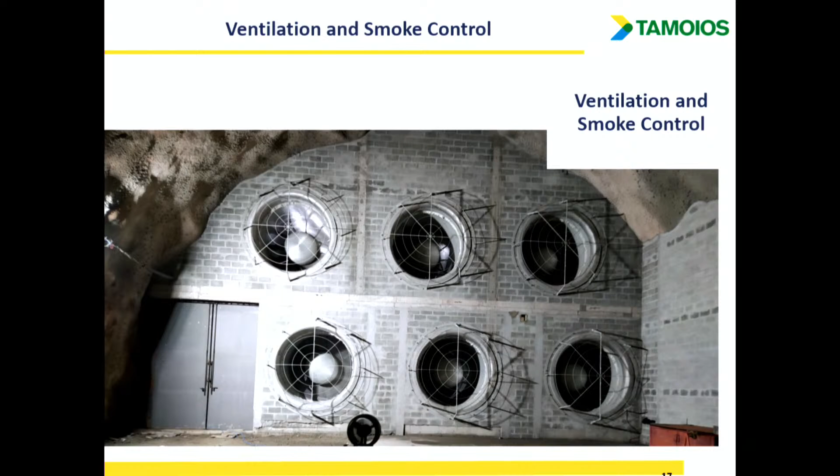The cost of the operational of the solution - but in case of fire, we need to extract the smoke more or less in the middle of the tunnel. So there is a huge smoke extraction system. It's a big cavern inside with a small shaft to outside. This is the back of the smoke extraction. The fans have 3 meters of diameter.

I told you that there are cross connections at every 200 meters. Of course, we need to protect them, and there is a specific system for pressurization to create overpressure in the cross connections in order to avoid the smoke getting into these cross connections.

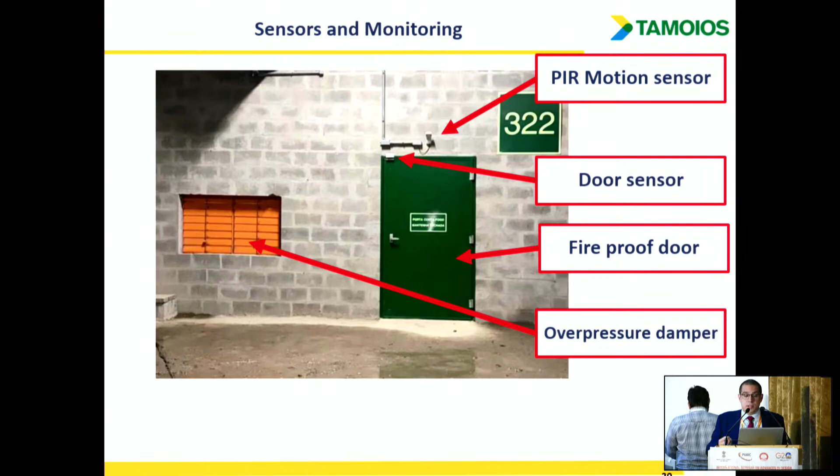And here I start - why we decided to install so many things in the tunnel? First of all, we need to monitor if those doors are used or not. This pressurization system keeps it shut down. There is no need to keep the cross connection pressurized if there is nobody there. So basically, you have sensors in the doors and also infrared motion detectors to detect if there is someone there. If someone opens the door, then we start the system. So it's a bit complex in terms of automation, but this can save a lot of money during the whole life cycle of the tunnel.

We install also in the tunnel a lot of sensors, as was discussed this morning as well. We need to monitor the air quality. In Brazil this is required by law: monitoring the opacimeter of the particles in the air, the NO2 and CO. So we have these 3 sensors along the tunnels, and also anemometers to check the airspeed.

There is also a loudspeaker system, of course, and this loudspeaker system needs to be audible for the people. So it's also important to have a noise sensor in order to control the volume of this system.

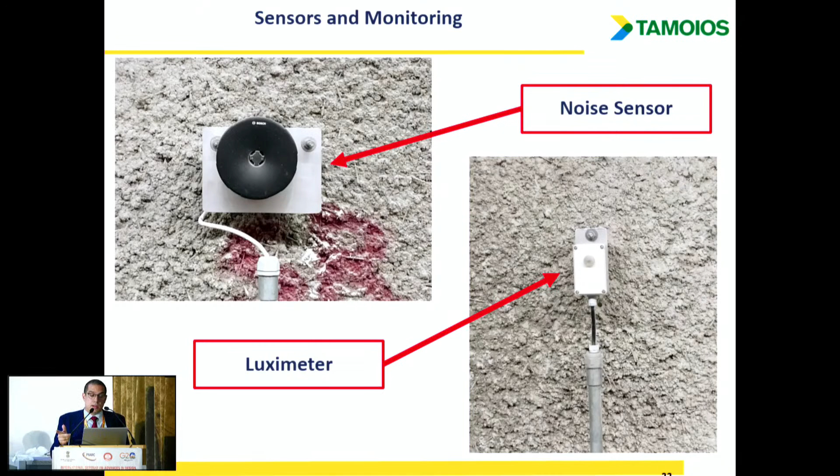We installed luximeters along the tunnels, and it's interesting because we need to make sure how much light we are giving to the drivers. Normally during the lighting design, we assume that a part of the light is lost by dirt on the luminaires or by the aging of the luminaires. But if you have no control of it, since day zero we are giving more light than is needed. In my opinion, it's too much light. If you compare how much light you give inside the tunnel versus a normal highway, tunnels are over-illuminated in general. And this represents the biggest part of the electric bill.

So, the ventilation sensors in more detail: it's a system combining the opacimeter, NO2 and CO, and anemometers. What are the goals of so many sensors in the tunnels? The air sensors' main goal is to get the most accurate information regarding air quality in the tunnel. If we have the right information from the tunnel, then we can make the right choices. It's impossible to keep those fans running if they are not necessary. So in order to make sure people are not subjected to pollutants beyond allowed limits, we need to meet air quality standards. Also during emergencies, it's important to keep control of the longitudinal velocity of the air, specifically because in tunnel 3/4 we have a smoke extraction shaft that requires some automation. Otherwise all the tunnels are longitudinal, which is easy - just press the button, turn on all the jet fans in the correct direction, and that's it.

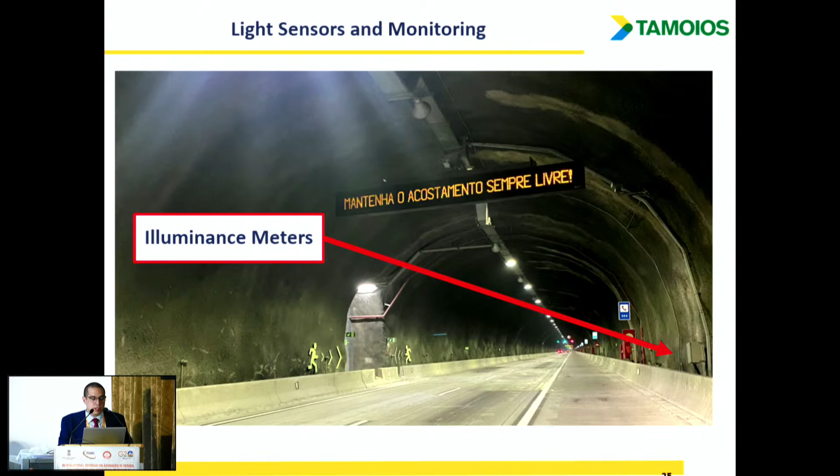In terms of lighting, I'll show you later why we decided to install so many lighting sensors. We have illuminance meters on the walls. The aim of those illuminance meters is to make sure how much light we are having from the light sources, not giving it directly to the drivers. They are small boxes on the walls, installed at every 100 meters.

Of course, in order to control the light and the adaptation lighting at the tunnel entrance, there are luminance meters. We have two luminance meters on each portal, at two different distances, used in two different scenarios. The goal of those meters is to get information from the external light in order to dynamically adapt the lighting. There is no reason to illuminate the tunnel entrance as if there were full midday summer sun if it's very early morning or late afternoon with no sunlight at the tunnel portal. The illuminance meters along the tunnel are used to control for dirt on the luminaires.

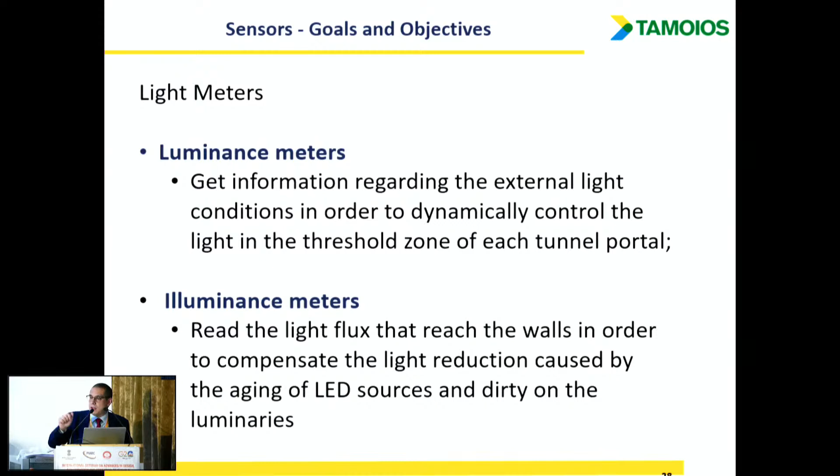In this case, we can give more power to the luminaires since we're planning a cleaning process in the tunnels.

So this is a general arrangement of the tunnels. There are also signals and communication. There are VMSs along the tunnels. And of course, CCTV and incident detection.

And the firefighting system. So we decided, based on Brazilian regulation, to install only the basic firefighting equipment. It means we have, at every 60 meters, this emergency point where there's available water, a fire extinguisher, and a telephone to communicate to the control room. Important thing was decided with the fire services: this system must deliver the same amount of water pressure and flow rate they have from their own fire tender.

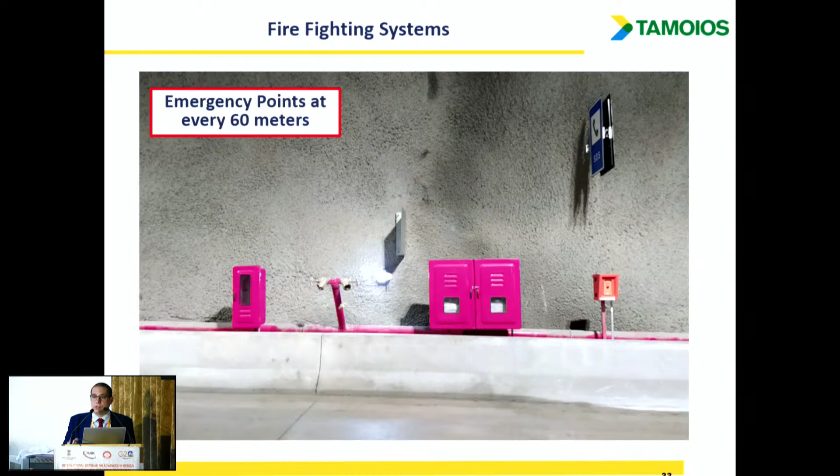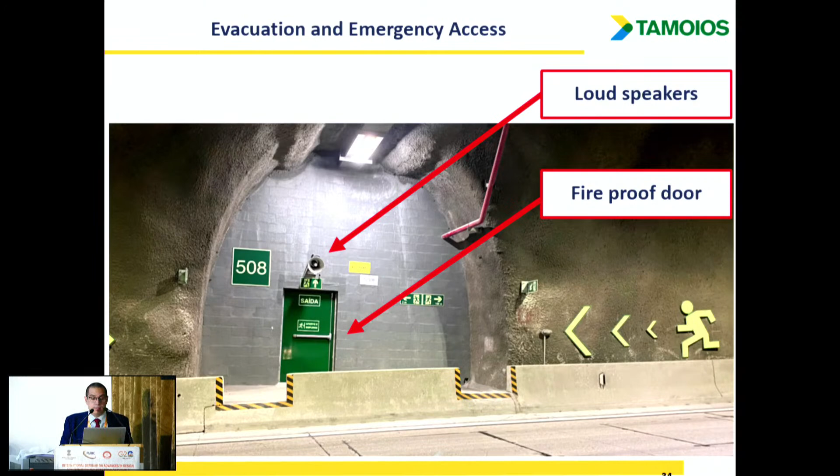So it's quite a big system. And of course, to protect evacuation, we have loudspeakers to guide the people there. This was a requirement by a specific Brazilian law that says we have to design the tunnels for deaf people, blind people, disabled people. So this was a requirement by the state. And of course, the cross connects are protected by fireproof doors.

So the water reservoir has 240 cubic meters, and the pump room is located in the highest part of the tunnel. So this was a brief presentation about the tunnels, but what are the main costs?

During the design, the customer was asking us—because this is a PPP project, it means the government is paying with public money for the construction, because the infrastructure belongs to the state. But the private company, with money collected by toll, has to pay the electric bills, maintenance, personnel, refurbishment, etc. So it was a huge question about how much this costs during the operation phase.

And we did a lot of studies at that time, and we decided a few things. First thing is that electricity is our biggest cost in this project. And we took two interesting decisions.

First decision was we only buy electricity from the grid to keep a normal operation running. It means in case of emergency, we generate our own energy based on diesel generators, because we don't have emergencies every day. So there is no reason to buy electricity from the grid 365 days a year if there is an emergency once or twice a year. So there's a stronger diesel generator system in the tunnel itself, in the tunnel portals, that can generate more than enough electricity to deal with any kind of emergency.

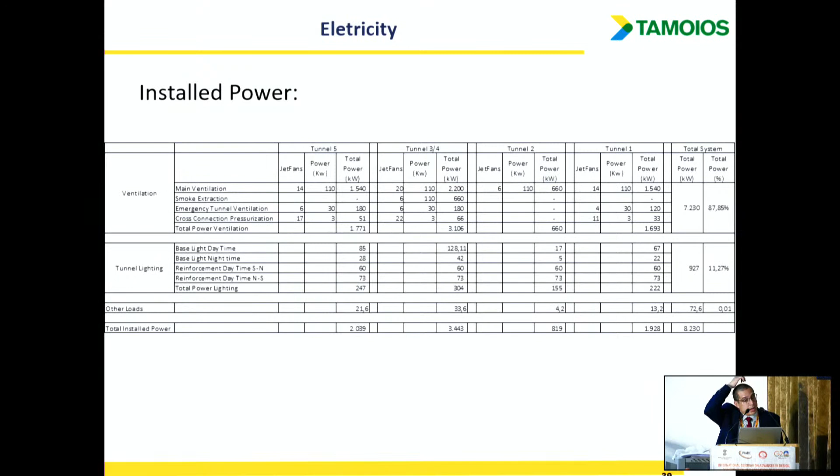Just to give you an idea about the electricity problem, in terms of installed power, the ventilation corresponds to 87.85% of the total power installed in the tunnel. But as Professor Peter Sturm told us in the morning, we normally do not use this if the tunnel has longitudinal ventilation with unidirectional traffic. For this reason, we decided not to buy this amount of electricity from the grid.

The tunnel light corresponds to 11.27% of the installed power, but corresponds to 95% of the electric bill. So for this reason, we decided to be very detailed in terms of monitoring the light and controlling the light, of course. Why did we decide that?

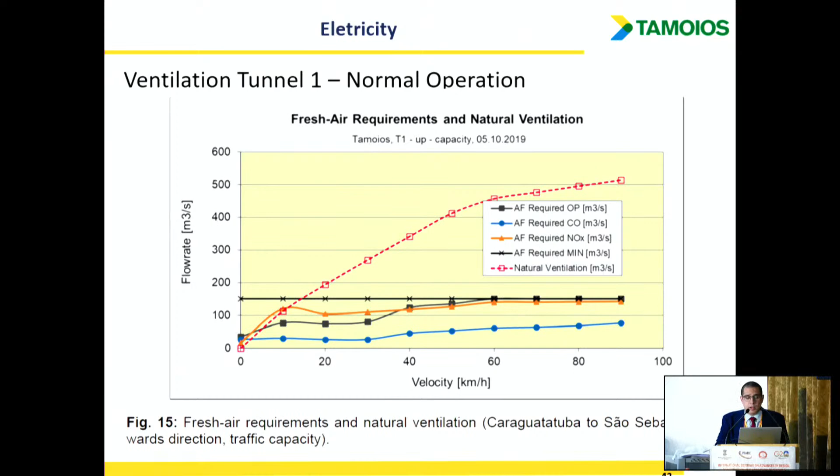During the studies for that, during the design, we computed the amount of fresh air required for the tunnel operation. And as the ventilation, as you can see here, is the biggest power installed in the tunnels, we looked into detail at those figures. And we found out that for a few tunnels, as I show you here, after 20 kilometers per hour—if the traffic is moving faster than 20 kilometers per hour—the natural ventilation generated by the car movement, buses and trucks, is enough to generate a flow that is more than sufficient to dilute all the pollutants inside the tunnel.

It means it's ventilation for free. But important: this is only valid if the tunnel is unidirectional, and if you know the traffic. If you don't know the traffic, it's difficult, or if you don't know the emissions, it's difficult.

But Brazil has quite good emission standards, and we could compute that it means we have to avoid at any cost traffic flowing lower than 20 kilometers per hour. If this is true, we don't need to start the ventilation, and of course we don't need to buy electricity or turn on the diesel generator.

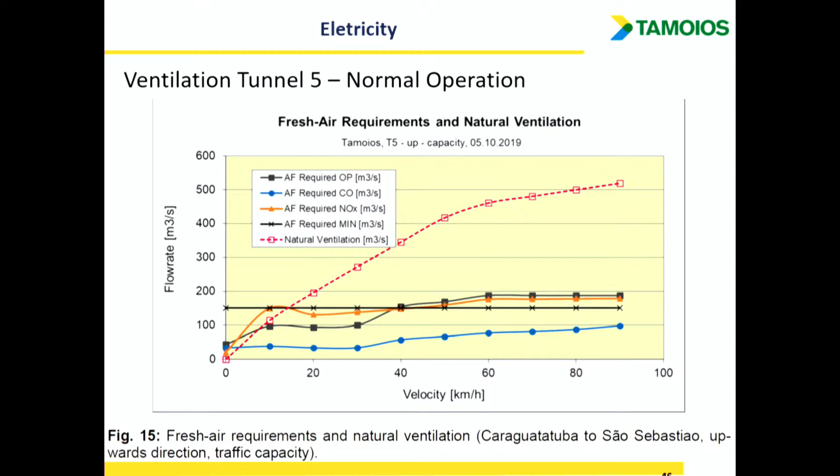For the 4 tunnels, as you can see, the lengths are a bit different, but more or less, at every tunnel, if traffic is moving over 20 kilometers per hour, it's safe. The natural ventilation generated by the cars is sufficient for normal operation.

So, as I told you, we decided in this project to install the electrical rooms just in the portals, and inside the electrical rooms there are the diesel generators.

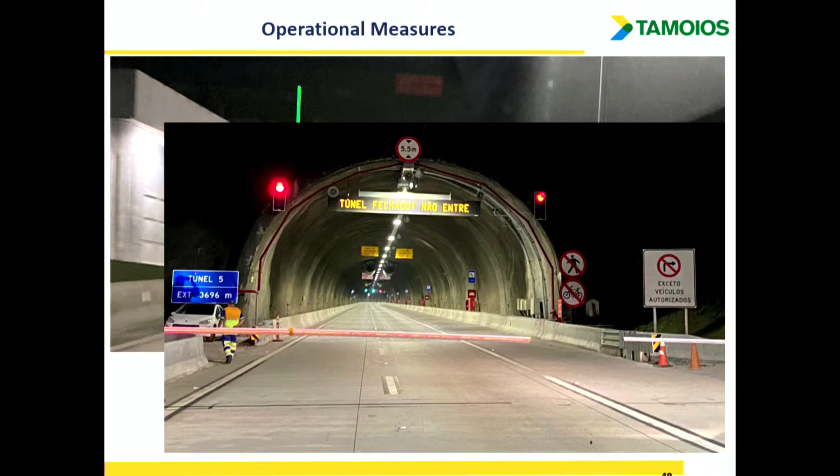As I commented with you also about operational measures, in case of tunnel closure - this is a tunnel portal, tunnel 5. Normally it's working like this: it's open, you have a green light, and the VMS is showing a normal message. But in case of emergency, or if you need to stop traffic for any reason, we do it directly from the control room, and this is the scenario drivers see in the tunnel. So there is no need to send personnel there.

So lighting, as I told you, is the biggest part of our electric bill. It means we have to be very detailed in controlling it. I know Pierre has a good presentation about this subject as well. It's an important subject, and the committee decided to investigate it also for the next cycle.

So what we did is already running. During the daytime, the light levels are more or less controlled by the outside lighting levels, and also by weather conditions. If the pavement is wet, it means we need more distance to stop cars, and we need to illuminate a bit more. But if the pavement is dry, there is no need to illuminate the tunnel entrance so much. We also consider traffic volume outside and the average traffic speed.

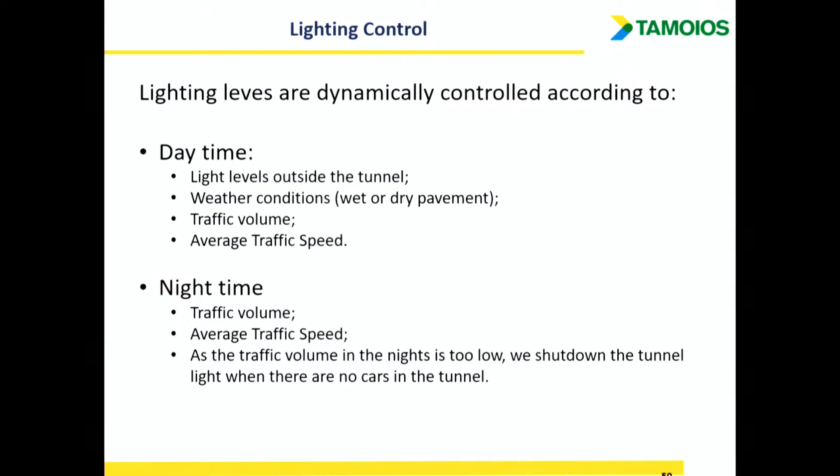I'm finished here. During the night time, we control it based on traffic volume and average traffic speed. It's important - during the nights the traffic is very low, so we basically shut down the lighting system and use just part of it. Thank you, and I'll be available for questions at the end of the session.

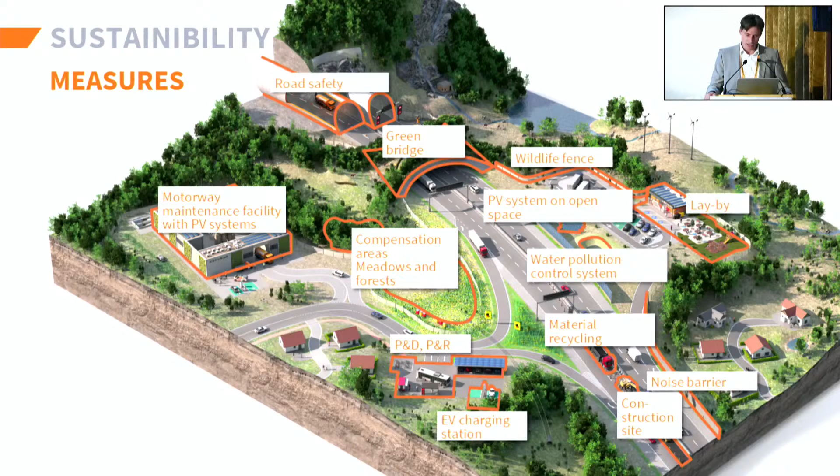Our sustainability measures are not only related to energy and operation savings in that area. We are also doing things like green bridges for animals, wildlife fences, material recycling from construction, installing noise barriers, and last but not least, installing a lot of photovoltaic systems, solar panels, to generate power and supply it for operation centers and also for our customers and infrastructures.

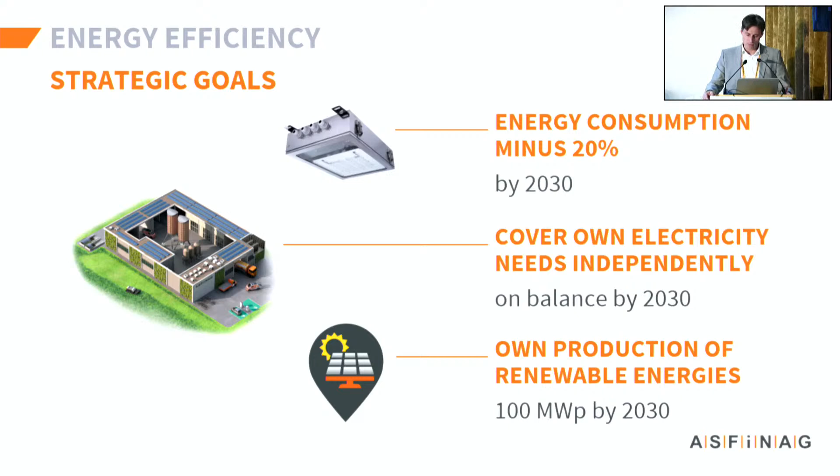What are the strategic goals of ASFINAG in the energy area? The first goal is to reduce energy consumption by minus 20% till 2030. Then we want to cover our own electricity needs independently on balance, meaning the total energy volume we need has to be produced by the road infrastructure by 2030. Therefore, we need to install around 100 megawatt peak photovoltaic system on our road network.

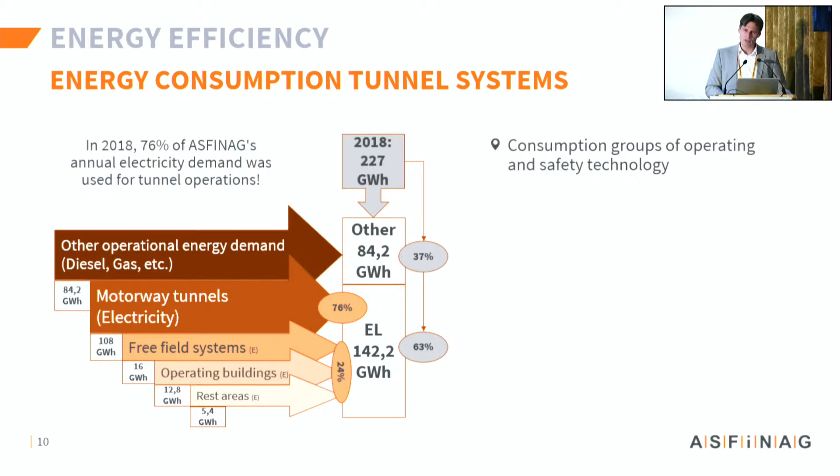When you look a little bit more deeper into detail, you can make a grouping of the safety equipment. There are some studies available on the market, by Astra, a Swiss company, and CEDRE is publishing these evaluations. For Austria, the best split is from CEDRE, what you can see here. The most important thing is, for your situation, your country, you have to see what is the energy need and the split for the equipment.

As we learned, when you have to run ventilation, you need a lot of electricity for the ventilation system, in terms of traffic jams. When you don't have to use the ventilation, then the energy goes to other operational equipment. In our case, we have 4 areas where 90% of the energy is consumed: lighting, the emergency power supply, the signaling, and the air conditioning of our technical buildings - this is the area where we install our communication equipment and the controllers, the servers, etc.

Now I want to give you a little bit of ideas what you can do, or what we do. The first is, as we just learned, the lighting. So what we do is install only LED lights. What you can see here is the ASFINAG standard tunnel luminaire lamp.

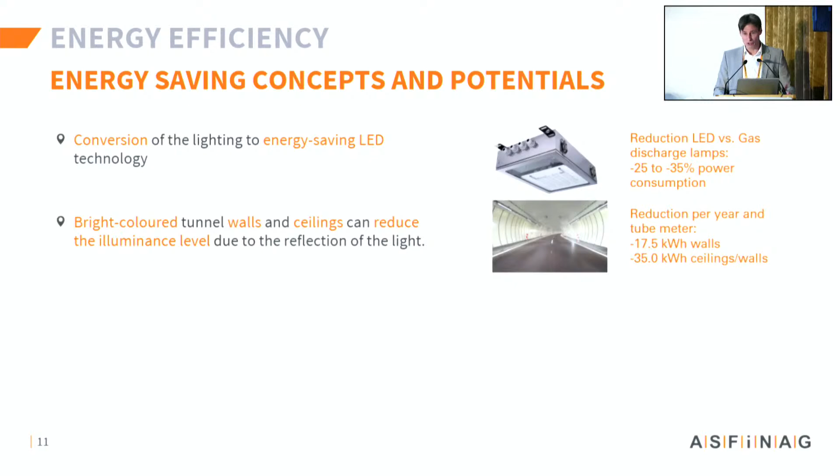The reduction option depends, but is on average around 30% energy savings. When we look at the tunnels themselves - we have seen now the Brazil tunnels, which are more or less dark - we believe that bright colored walls and ceilings help to reduce the lighting need. So we carried out an R&D project with one of our universities, and as you can see, you can save 17.5 kilowatt hours with bright walls. In addition to that, when you light up the ceiling, it's a better effect.

Then we have another option regarding the cooling of the technical facilities. Here we have some projects in place where we use the extinguishing water of the standpipe system in combination with heat pumps to also reduce the energy in that area.

Last but not least, this is for me the most important technical application for the future in road tunnels: replacing the emergency power supplies. The batteries, the systems, are permanently loading, so you lose a lot of energy here, and you use the batteries only as a backup for emergency operation situations. By replacing them with industrial battery systems, now available on the market, you can use them in more than one way - also to store your own produced energy and shift the usage into the night.

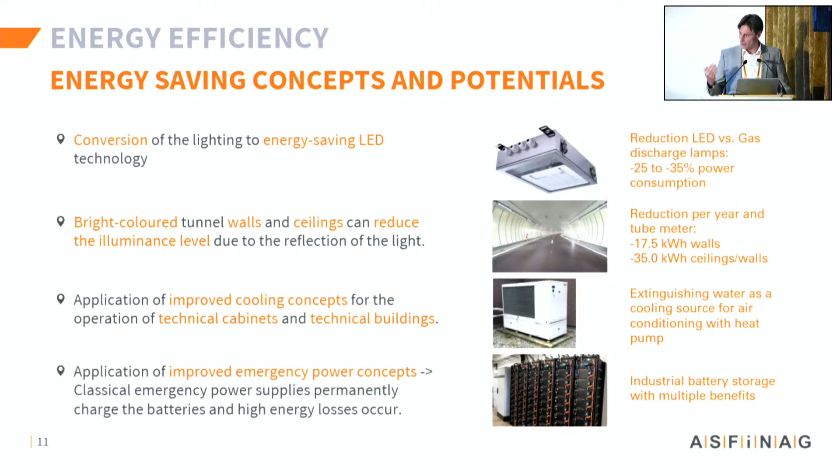When we look at the measures for generating our own electricity, there are some international role models. The Zero Energy Tunnel is from the Netherlands. Then there's a very good report from PIARC, the PIARC Positive Energy Road report, which I recommend. All these reports say the same thing: the road infrastructure should produce their own energy, using renewable energy sources, and everything should happen on a balance sheet base.

When I look at the situation here in India, you have a lot of sun, so you'll have a better situation than we have in Central Europe. And the upgrading of tunnels to smart grid, with a question mark - I'll show this later.

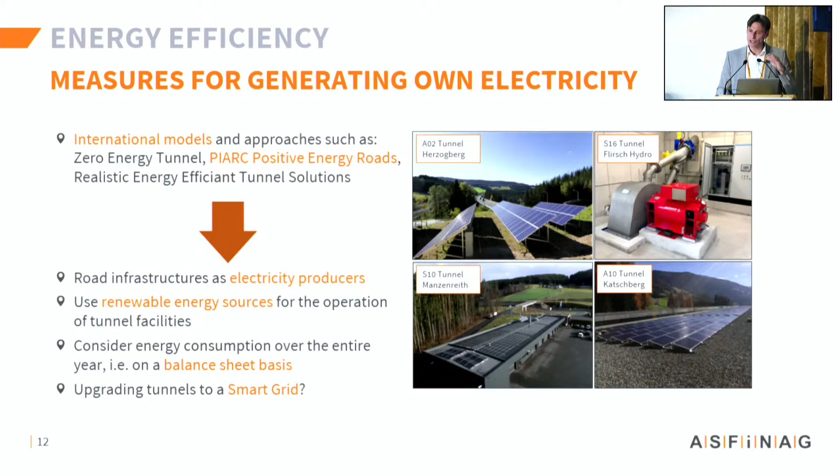So these are some examples of what we do. On the left side is an installation next to a tunnel. We're using hydropower plants when we have water to operate the tunnels, and we're also using our operation facilities where we operate the tunnels - in the background you can see a tunnel. So this photovoltaic installation is feeding or supplying the tunnel.

Some additional information: these are typically operation centers we have, and these are also now getting upgraded with photovoltaic systems. And we are also charging our own car fleet with the energy we're generating from the sun.

Look now at the electricity demand. As we learned before, in 2018 we had 108 gigawatt hours of demand electricity, and by 2021 we reduced already by minus 10%, and to reach our strategic goals we have to additionally reduce by minus 15%. When we look at the cost side, because not everything is about green operations, in 2018 we had 10 million euros of electricity costs, and this was, by 2021, already 11.3 million. So you can see a drop by minus 10% in the need, and the price went up 10%.

But this year, 2022, we had 30 million euros, so 3 times more, because of the Ukraine war and the effects on the energy market in Europe. So when we're talking about the question mark I've shown you, we can use these power storage options.

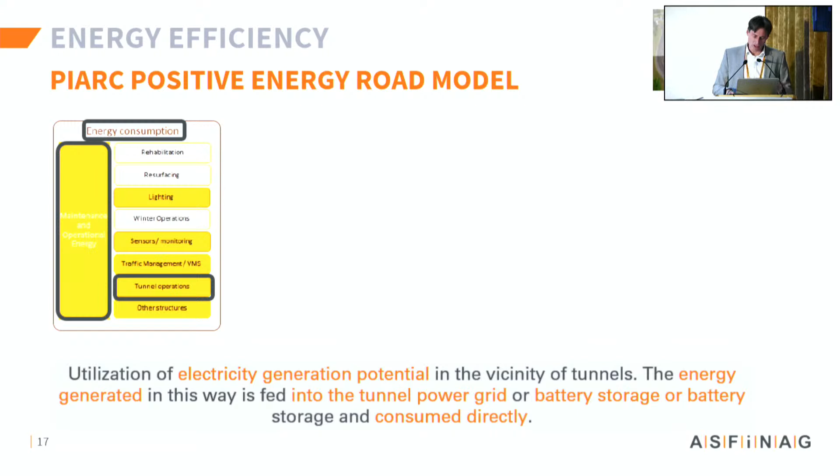So this is the PIARC positive energy road model. At the end, it is done for the whole road network you're operating, but it's pointed out especially here for tunnel operation. On the other hand, as it is described, the use of solar arrays in that case. And in the middle, you can provide your energy by the local energy grid, or maybe with batteries and photovoltaic power. And why do this?

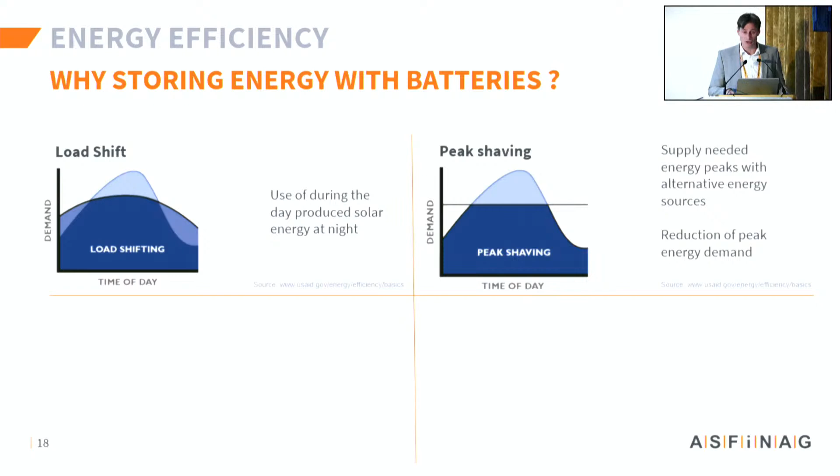As I said, when you produce the energy during the day, you can store it and use it at night, or you do peak shaving. Before we've seen little generators for these peaks - here you can do it with batteries. Blackout resilience, so you're more independent from the grid, and it's a positive effect on your overall electricity network.

And what we are talking about now is the road tunnel will be supported in the future by photovoltaics and a battery storage system. What we want to use are electrochemical storage systems, meaning batteries. And this is the practical project we implemented.

Everything's fully automatic, no manual interruption needed. And it works perfectly. If everything fails, switch over to the diesel generator, but this is only an option.

So the conclusion: first, reduce your electricity consumption through measures. Second, promote the expansion of own power generation, meaning as a road operator, produce your electricity yourself. Third, launch a project and see if industrial batteries in tunnel applications work. Then when everything's fine, switch over to a smart grid functionality.

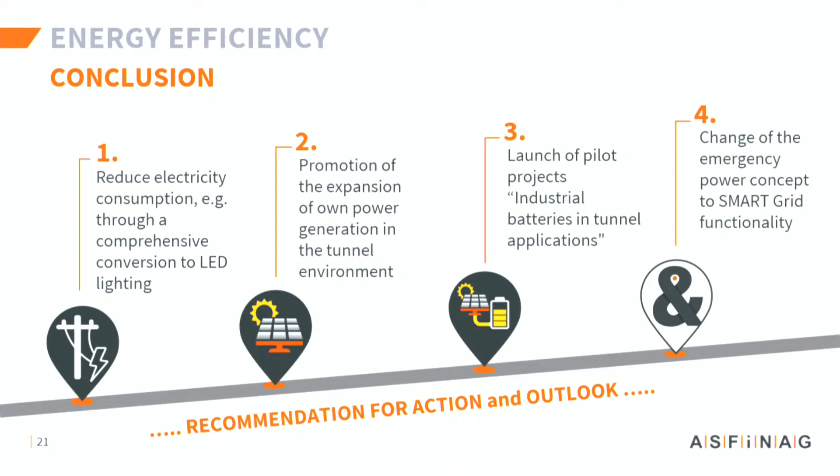And what we do now, today, tomorrow, we have the construction start for a 16.8 kilometer highway, the outer ring of Vienna. There are 6 tunnels, and we're installing 4 megawatt peak of photovoltaic systems and 5 megawatt hours of battery. We will be in the position to operate this highway section with the 6 tunnels for 10 hours with the batteries - during the day with the sun, and at night via the batteries. So thank you very much, questions later.

Thank you, Rene, for a wonderful presentation on energy saving issues. Now the last presentation is by Mr. George Maverin from Australia. He'll be presenting sustainable road tunnels.

Okay, Namaste. I hope I've pronounced that correctly. What I'm trying to say is good afternoon. Now I'm from Australia, and if you're not aware, Australia and India are fierce competitors in the game of cricket. In cricket, when you're fielding, you usually start with your fast bowler, then bring your medium fast, and later bring your spin bowler. In this team, I'm the spin bowler. You'll have to listen very carefully to my presentation because you don't know whether I'm going to bowl leg spin, off spin, or bowl straight. So listen carefully.

Road tunnels require significant resources and energy to construct, operate, and maintain, so they are potentially a major source of greenhouse gas emissions and environmental pollution. Could be a problem there. Developing practices to improve the sustainability of road tunnels is necessary to reduce the pressure on scarce resources and the natural environment.

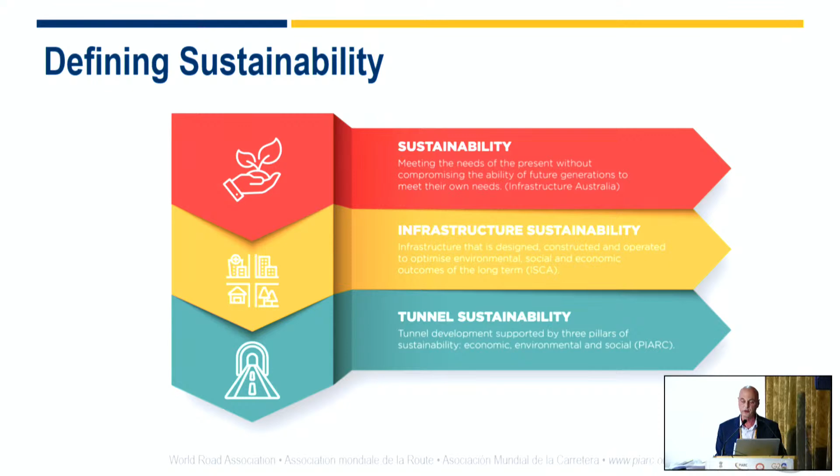In 2017, PIARC published a report titled Road Tunnel Operations, First Steps Towards a Sustainable Approach. It is report number 2017 R02EN. You can access it from PIARC's website. This report defines the concept of sustainable development and its relevance to road tunnels. It provides an inventory of the main methods used to assess the impact of initiatives undertaken within a sustainable development approach. It includes initiatives and actions for a more sustainable approach, and has recommendations and suggestions for future studies in the field. If you haven't already read this report, I highly recommend you download a copy from the PIARC website and read it.

The concept of sustainable development is based on three pillars: economic, creating wealth and improving living standards; environment, preserving species, natural resources and energy resources; social, meeting needs in terms of health, education, housing, employment, etc. These pillars are given a lot of attention in preparing a business case to propose road infrastructure, including whether to incorporate a road tunnel or not in the proposal.

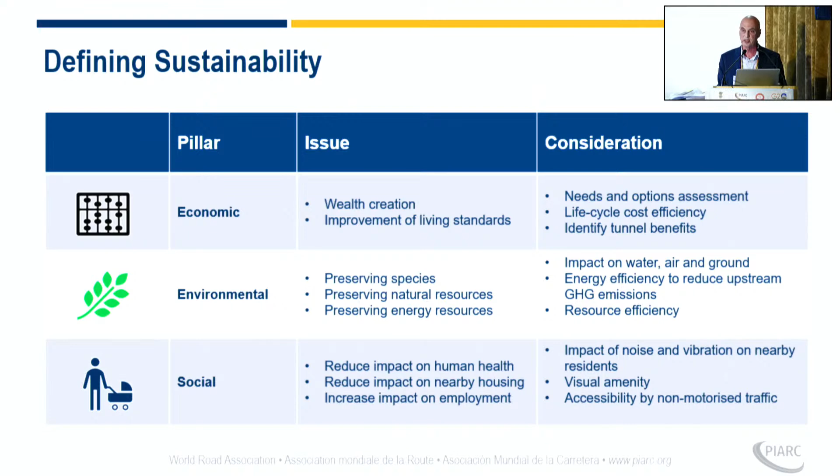I've presented just a few points of each of the three pillars in the planning and design phase. Consideration of these pillars should extend into the construction phase and the operation maintenance phase. A measure or set of measures for a road tunnel project can only be considered truly sustainable if all three sustainabilities are supported. In practice, this is rarely the case. For example, construction of a new tunnel may be beneficial for the economy and have social benefits, but may not be positive for the environment. So the choices made for sustainability are the result of a compromise across the pillars, using multi-criteria analysis or benefit cost analysis to quantify the effects.

How do you measure sustainability? Well, in Australia, we have established the Infrastructure Sustainability Council, and one of its main functions is to rate infrastructure sustainability. When infrastructure is designed, the designs are presented to the council for rating. At this time, the infrastructure developer gets a good indication from the rating as to whether their proposal will meet the client's sustainability requirements or not. The rating tool that's used is based on environmental, social and economic criteria.

If the proposal does not meet the specified rating, the design can be modified to try and achieve a higher rating. So this is the time really that you're putting a lot of effort into getting your planning and design right, to get the best outcome and minimise your costs.

Following construction, drawings showing the as-built condition of the infrastructure are again submitted to the council for rating assessment. If the sustainability rating of the constructed infrastructure falls short of the client requirements, well, it's too late. You can't go back and reconstruct what you built. So some clients can impose a significant financial penalty on the developer as a result.

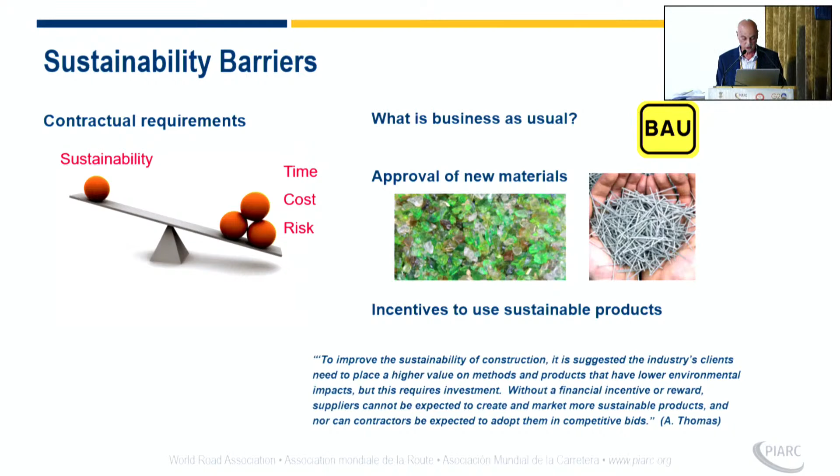I hope you're still listening, because I've just switched from leg spin. I'm now going to go to off spin, so be very careful.

There are other barriers to ongoing improvements to sustainability of road tunnels, such as a lack of political will to invest in sustainability, lack of policies that require sustainable outcomes, lack of experience in sustainability assessment, perceived operational risk associated with previously unused sustainable products, and the list of barriers goes on. It's very important that we identify all barriers and find ways of dealing with them.

Let's have a look at some sustainability initiatives that are relevant to road tunnels and also on the open road network. Firstly, pavement materials. The use of rubber from old tyres has been used in spray seal surfacing of roads for many years. Now, much greater use of crumbed rubber is being developed for asphalt materials.

Crushed glass is also being trialled in pavement layers and for use in bedding materials for drainage. Crushed concrete and crushed bricks are being used in pavement layers. Apparently, the fines in crushed bricks have a characteristic that is similar to a cementitious binder, so that's really promising.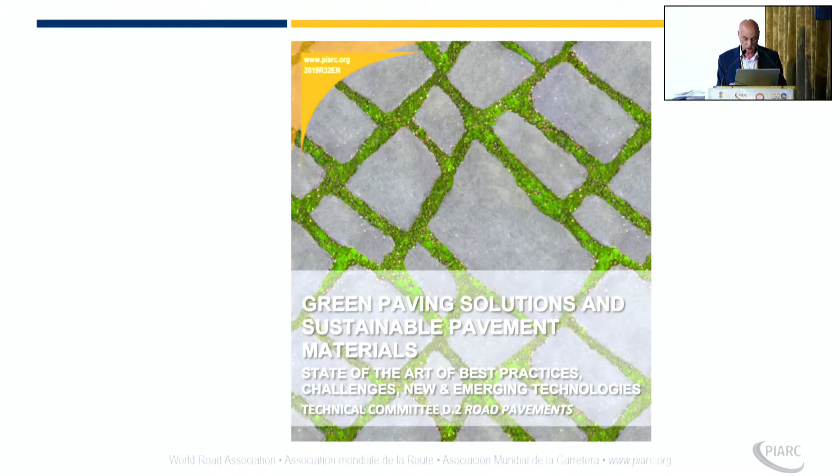Recycled glass in concrete. Concrete includes aggregates made of sand and crushed rock, which constitute 65 to 80% of the mix. Approximately 50 billion tonnes of aggregate are used annually globally. In Australia, recycled crushed glass is beginning to be used in concrete to replace sand and in asphalt mixes.

However, many standards do not permit the use of glass in some grades of concrete. At this time, the risk is considered too high to allow recycled crushed glass in the higher quality grades of concrete. Looking at geopolymer concrete, that's regarded as a low carbon concrete.

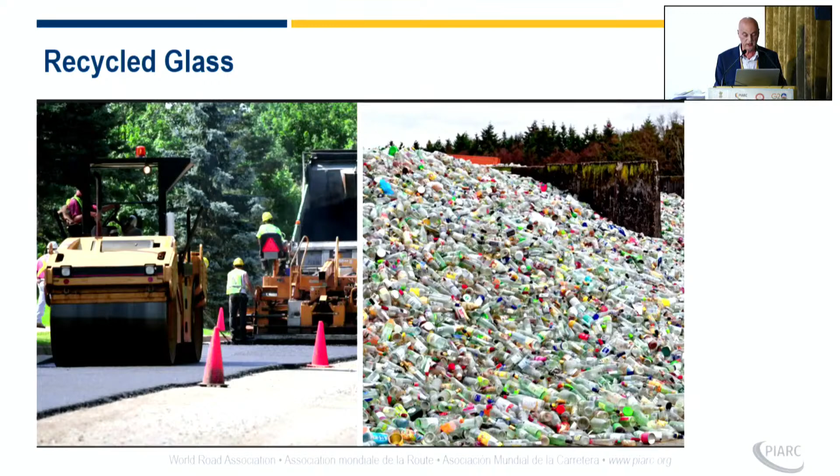Geopolymer concrete is made with a geopolymer binder rather than cement. Removing or reducing the use of cement is important because the cement production process creates a large amount of carbon emissions. Cement production accounts for 5% to 8% of the world's carbon emissions. That's enormous.

Geopolymer binders can use various waste products such as fly ash, blast furnace slag, as shown in this slide, palm oil fuel ash, and mining waste. There are other benefits of using geopolymer concrete, such as less shrinkage than conventional cement-based concrete and potentially better tensile and flexural strength. The main barrier to the use of geopolymer concrete is the lack of standards.

In Australia, there are developments to amend the structural concrete standard to provide for geopolymer concrete. Another barrier is cost. Geopolymer concrete is currently approximately 10% more expensive than conventional concrete. However, once this type of concrete is permitted in standards, it will be used increasingly, and through economies of scale, it will become more cost competitive.

Another emerging factor which will assist the adoption of geopolymer concrete is the weighting given to carbon costs. In the UK, the government is looking to award economy boosting funding to projects which demonstrate a commitment to low carbon technology. I spoke earlier about the use of fly ash and blast furnace slags to reduce the cement content.

I've recently learned that because we are planning on reducing coal-powered stations and changing the way we produce steel, we can expect to run out of blast furnace slag and fly ash in the not too distant future. This is disappointing, but there's some good news.

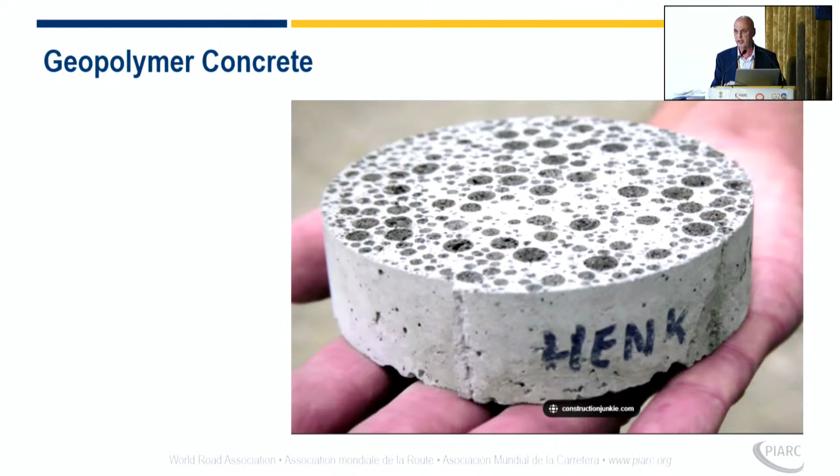Spoil reuse. The construction of tunnels generates a significant volume of excavated material. Rather than dump the excavated material into landfill or create earth mounds, better value can be gained by repurposing the material to avoid the need to source scarce higher value materials.

If the excavated material has an adequate strength, it could be crushed and used as pavement material. If the excavated material is softer than rock, it could be mechanically stabilised and used in the lower layers of pavement construction.

Mechanical stabilisation is used extensively in road building. Here the added materials are shown as lime or cement, not really sustainable additives. Another way is to mix natural unprocessed materials to upgrade the quality of the mix.

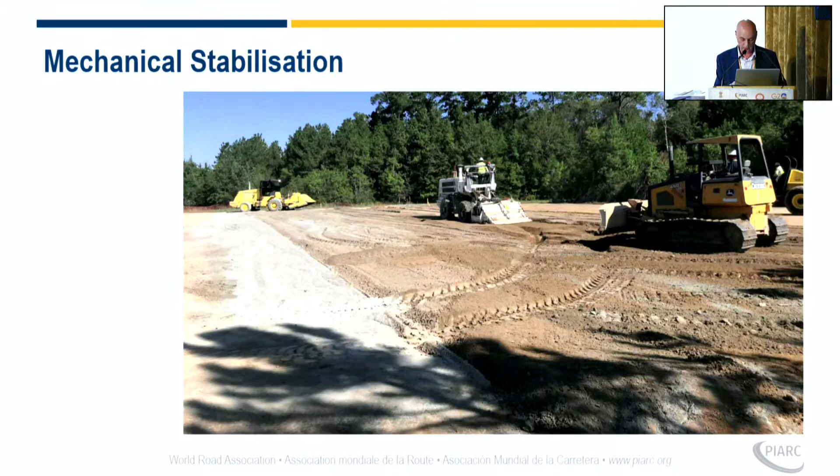Looking at portal emissions, most road tunnels in Australia are not allowed to have portal emissions. To achieve zero portal emissions, all tunnel air is discharged through the tunnel ventilation outlets, which requires pulling air at the tunnel exit portals against the natural direction of flow, the piston effect. This requires the tunnel ventilation system to operate 24 hours a day at a significant cost in energy consumption.

Environmental licensing authorities are favourably considering proposals to allow portal emissions at times of relatively low vehicle use, for example from 8pm at night to 4am. The EastLink Tunnel in Melbourne had its air emissions licence amended to allow for daytime portal emissions in addition to nighttime emissions, mainly because energy conserving upgrades to the ventilation system were introduced. The energy savings were in the order of 68%, saving approximately 9,000 tonnes of carbon dioxide each year.

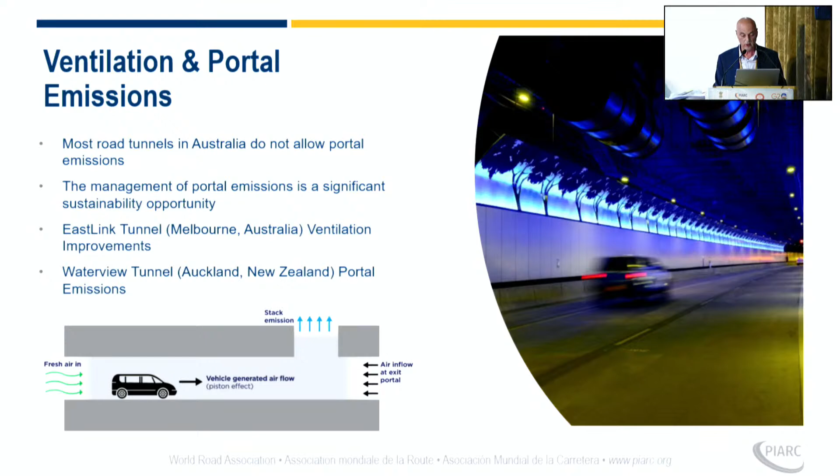Looking at immersed tunnels. Based on AECOM's recent experience, some clients request the construction industry prepare proposals to design and build an immersed tunnel in a harbour. AECOM's analysis is that a tunnel boring machine tunnel solution provides for around 80% reduction in carbon emissions compared to immersed tunnels. In a recent tender, AECOM proposed a tunnel boring machine proposal as an alternative to the client's request for an immersed tunnel, and the client accepted and adopted the tunnel boring machine proposal by AECOM, which was encouraging.

Looking at ventilation fans, a necessary piece of equipment in many tunnels, as we've heard about from earlier speakers. The use of efficient variable speed fans is worth considering. A tunnel operator stated that variable speed fans governed by tunnel air quality can save around 60% of the energy required to run fans at normal speed.

In South Korea, they are undertaking a trial to harness the energy created by tunnel fans when they are not in use. When the fans are not switched on, they spin around because of the piston effect caused by vehicles pushing air along a tunnel. This energy created by the free spinning fans can be captured and stored in a battery for later use when the fans are switched on.

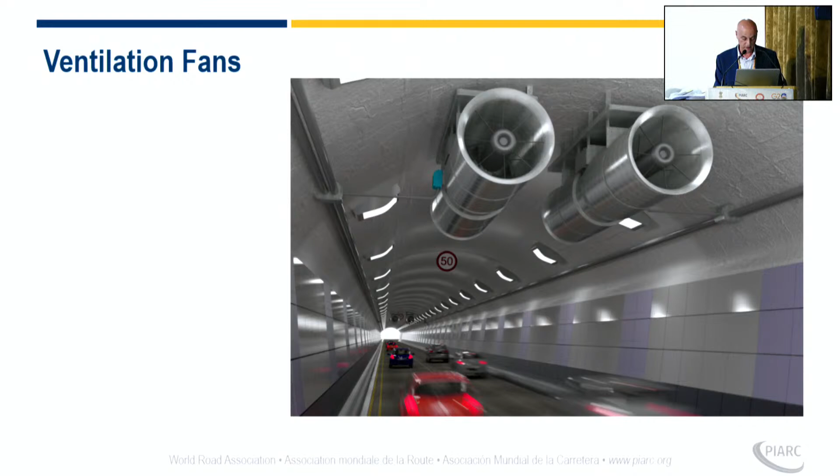Transportation of materials on our construction sites. Greater use is beginning to be made of alternatively powered vehicles for construction, that is, alternative to fossil-fuelled vehicles. We are learning that some construction companies are planning to use electric vehicles and hydrogen-powered vehicles for the next generation of their projects. In fact, alternatively powered vehicles are already being used by the Australian mining industry.

Diesel engines for mining have about 45% efficiency, while electric drivetrains can hit an energy efficiency of around 90%, twice the efficiency of diesel engines. A standard diesel-powered dump truck used in mining uses between 50,000 and 100,000 litres of diesel each year and emits between 130 and 270 tonnes of carbon dioxide a year. I think their life is short-lived.

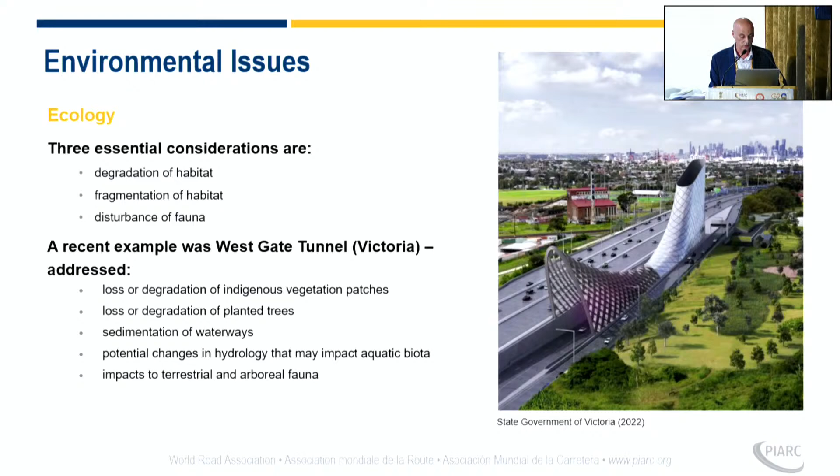New generation projects can involve the preparation of environmental impact statements that include climate change risk assessment. This includes projects with tunnels. The assessment of climate effects needs to cover the construction phase period, typically a period of around 4 or 5 years, and also for the long term, so the next 60 years or so. Greenhouse gas impacts assessments may also be undertaken.

In the process of planning, designing and constructing our road tunnels and the connecting surface road network, we must give careful consideration as to how we will minimise the impact on the environment. For example, in Australia, our current practice is to rate the quality of the native vegetation at a project site, and for each native tree that is removed, you must replace it with another tree or two trees, and depending on that quality, the value goes up.

A really highly valued tree might mean that you've got to replace it with 20 trees. And if you can't replace with any trees, then you may have to make a financial contribution to enable purchase and planting of trees nearby the construction site. We must also give consideration to minimising the impact on waterways in close proximity to our projects.

I'll keep moving. I strongly believe that we can successfully develop and deliver sustainable road tunnels. To achieve this, it requires leadership by various participants in the process. We rely on the leadership of clients, who are typically government departments or authorities, to make clear what their requirements are for sustainable road tunnels as part of a sustainable road network.

We rely on leadership from our planners, designers and constructors to develop and implement tunnel solutions that meet client requirements. If there's a lack of government directive or requirements, we need our infrastructure deliverers to show initiative and leadership and proceed to implement sustainable road tunnels anyway.

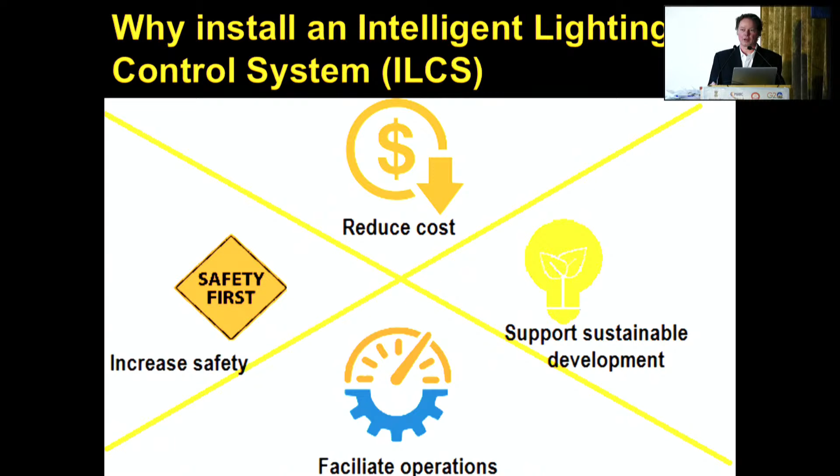Next is increased safety. The lighting in the tunnel is a safety element - if you don't have light, that may create accidents or other problems. The lighting system doesn't just provide light, it plays an active role in tunnel operation, which we're going to see later on. And of course, it facilitates operation and maintenance. Closing a tunnel to do maintenance inside costs a lot of money, so we can use the control system to remotely diagnose the problem - when you arrive inside the tunnel, you fix it and reopen it. That's one of the objectives here.

So again, the cost of the lighting control system is very high. Depending on the size of the tunnel, on a very long tunnel, the ventilation, depending if it's a single tube or two tube, ventilation may be high. But on a small tunnel or underpass, something between 500 meters to a few kilometers, the lighting control system is the system that will cost you the most. So this is where you want to optimize as much as possible.

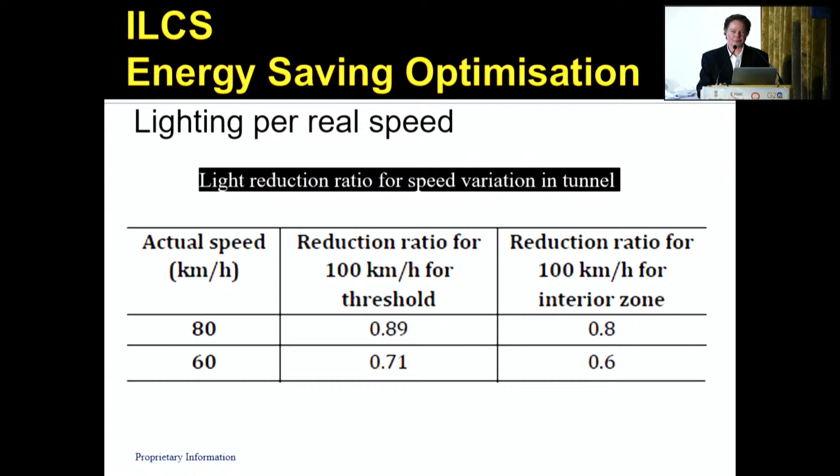The entering speed inside the tunnel will also have an impact. If you reduce the speed, you can reduce your light level. It's part of the standard that we're going to see, and that's another place to reduce the energy cost. In the previous presentation from Brazil, if you recall, they mentioned that they control the lighting system depending on the speed of the traffic. So that's a good way also to reduce the energy cost.

There's different standards related to the safety in your lighting system. In North America, we have what we call the RP8, which is a standard that defines the light level that needs to be applied inside your tunnel in the different zones: threshold zone, transition, interior. We have in Europe the equivalent standard, which is CIE 088. Both standards have been revisited recently due to the addition of the LED system, and both standards are very, very similar, although there are some minor differences between the two.

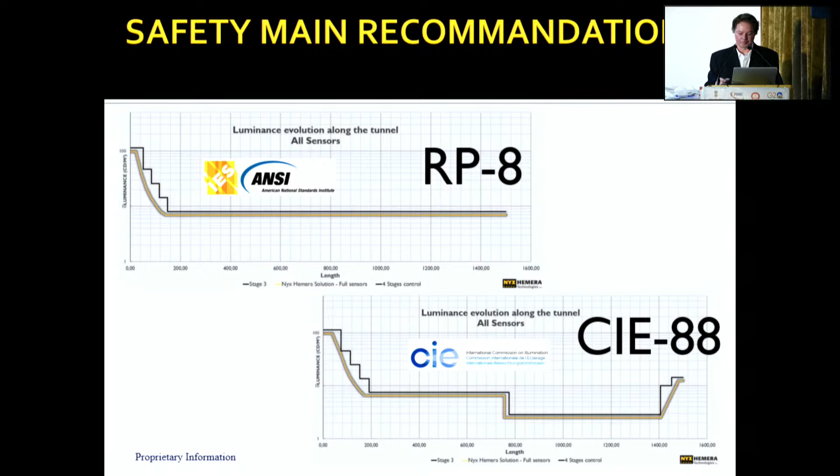The idea of the lighting control system is basically to avoid the black hole effect. So when you drive inside the tunnel at a certain speed, you enter into a black hole. So what you want is to have a lot of light at the entry of the tunnel to avoid that black hole effect. And as you drive through the tunnel, you can reduce your light level because your eye will adapt properly to the interior of the tunnel. With the addition of the new luminaire, the LED, that creates a new effect, the glare effect. If the tunnel is too bright, that causes exactly the inverse. So you have to have exactly the right light level for the driver. It's a safety issue.

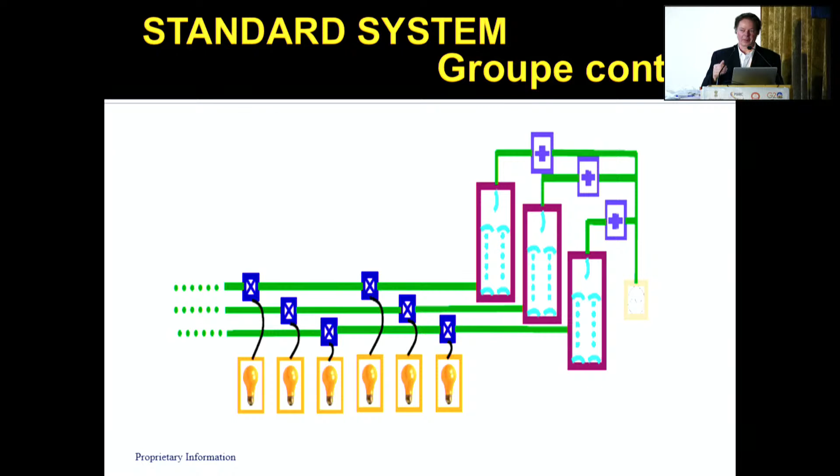In previous systems, when we used sodium lamps, the typical control system was really basic. It was a typical contactor base where you basically switch on and off. There's no dimming with high pressure sodium lamp, so you switch on groups of luminaire. It can be 50, 60, 100 luminaire in a group that you switch on at a certain time. Typically those previous systems used 2-3 levels, 2-3 groups, so that used a lot of energy and a lot of consumption.

The new system, basically with LED, there's two different types of systems that we're going to talk about here. First, you need the power. You need to bring power to your luminaire. Without power, of course, your luminaire will not work.

In some systems, they also install control cable. We will see that there's maybe an alternative option to control cable to optimize your system. Using a standard control cable in a tunnel environment, that's a lot of connections between your luminaire. You have to think that a luminaire system in a tunnel is not 2 or 3 luminaire, it can represent 500, 1,000, multiple thousands of luminaire. So having a control cable connected to each of your luminaire, that's a lot of connection points inside your tunnel. Adding to that, the control cable will need to go through conduit, junction boxes, and put a lot of luminaire in series to a communication control bus. So that's a lot of equipment that you install inside your tunnel, which may not be the optimized way to do the control system.

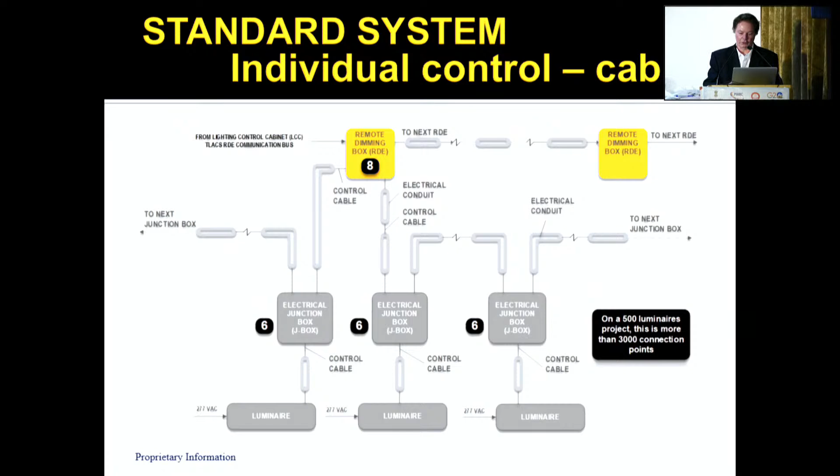The other solution or alternative is to use power line communication. You already need power to power up your luminaire. Adding a power line communication basically means not using a standard or independent control cable, but reusing the electrical power cable to inject a high frequency signal on top of your 50 Hertz, 60 Hertz. So you minimize the infrastructure inside your tunnel.

The power line communication has been developed for many years. The first power line control system, not necessarily for tunnels, was developed in 1970. So it's not a new technology. It's a technology that has been developed for many years, and of course, like all other technology, it has been improved. Right now, we do have some technology that combines multiple types of communication techniques, very similar to your cellular modem. If you are in a high city with very good connection, you will be on 5G connection. If you are in a lower connection area, your system will adapt to edge or to a lower communication speed. A very similar technique is applied to power line communication.

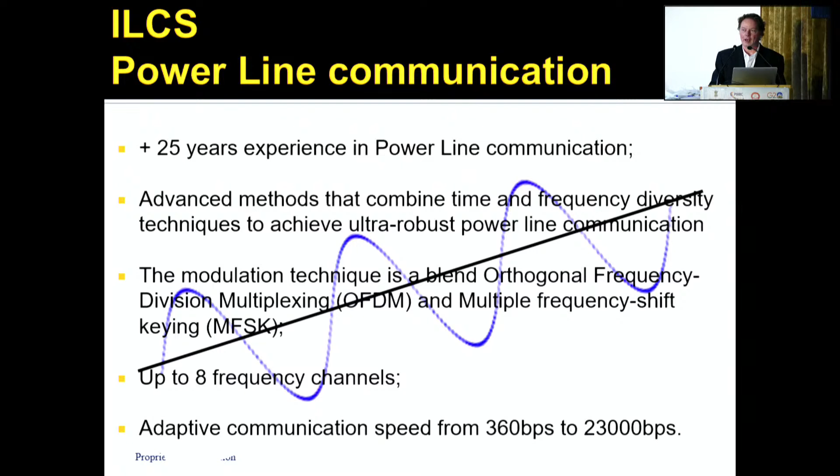The previous system used a typical 3-lighting-stage setup to power up your system, based on an external sensor, the luminance photometer, which was also present on the previous presentation. It basically captures the light level at the portal, sends this to the lighting control system, and adjusts the light level. The previous system used a very low number of lighting stages, which is not really optimum for energy saving.

So when you have an advanced lighting control system, we can multiply the number of lighting stages as required. You can apply 10, 20, 25 lighting stages in your system, basically lining up the right light level according to what is outside the tunnel. That's really a way to optimize the lighting stages.

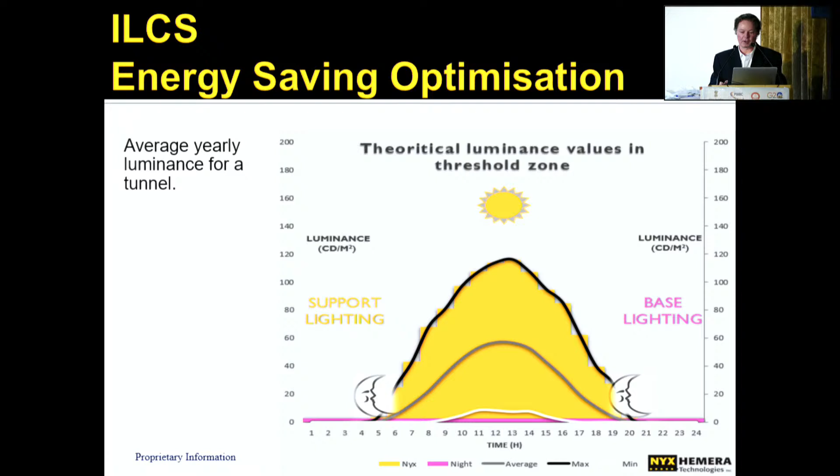The other nice feature of the new lighting control system using LED is that the system can compensate for other variables that will affect your lighting system in a tunnel. First, dirt depreciation: as cars go through the tunnel, there's a lot of carbon monoxide that gets onto the light, which reduces the light level.

Between cleanups of the tunnel and your luminaire, let's say you do a cleanup every 6 months, during that period the system can compensate for the dirt depreciation. With sensors installed inside the tunnel, like the luminance photometer, the system can compensate and increase the light level a little bit to make up for the dirt depreciation.

Also, the LED electronics have a certain lifetime, typically 100,000 hours of operation. Over time they reduce the light level, losing some physical characteristics. The system can compensate for that too. As soon as the light is on, the system can calculate how many hours each luminaire has been on, and compensate over time for the light loss factor.

These are different techniques to improve your system and make sure you have an optimized system that will reduce energy consumption. That's a typical lighting control system used in more and more tunnels. But how do you use that system in troubleshooting? That's also a good reason to have a good control system—it's a way to determine what the failure is, so when you enter the tunnel, you know exactly what to resolve.

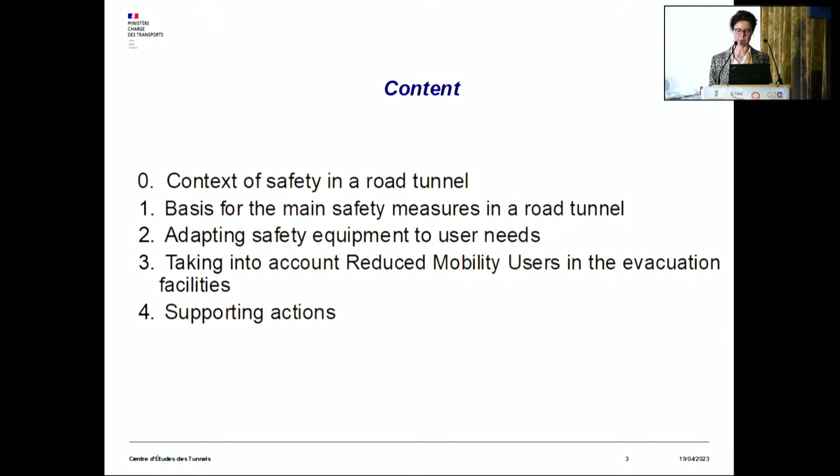Whether or not it's the result of an accident, the consequences of a vehicle fire in a road tunnel can assume catastrophic proportions in terms of human lives lost. In 1999, the fire in the Mont Blanc tunnel had a severe impact on public opinion, and it mobilized the attention of French public authorities on the question of safety in road tunnels. As a consequence, a certain number of texts have progressively specified the procedures as well as technical measures to be followed in tunnels longer than 300 meters.

Those main safety measures in a road tunnel can be grouped into 5 categories. The first category is prevention by controlling traffic conditions, that is to say measures which are traffic directed in terms of flow and in terms of composition. The second group is measures for assisting the evacuation of persons. I'll come back to that in a minute.

The third category is provision for ventilation and smoke extraction. These are specific equipment to manage the air and the smoke inside the tunnel in case of a fire. The fourth category is fire behavior of structures, which deals with specific civil engineering development inside a tunnel in case of a fire. And the fifth category is the organization of surveillance, intervention, and operation. These are various technical tasks which are performed by the tunnel operator and rescue services.

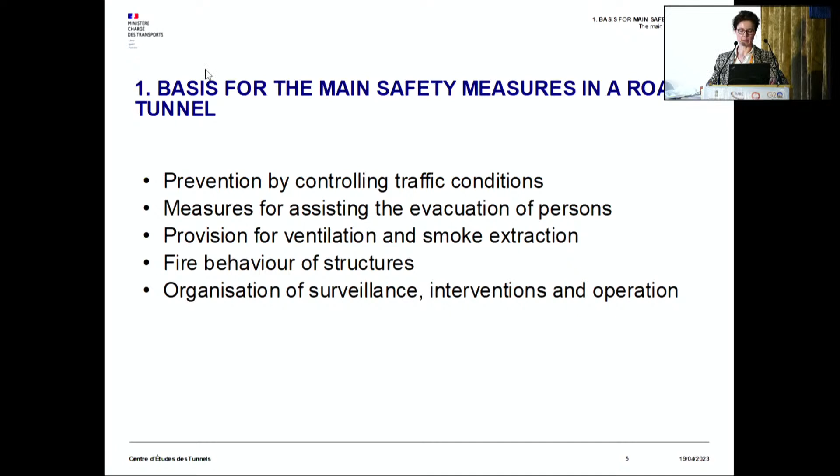So let's focus now on measures for assisting the evacuation of persons. The strategy for a fire in a road tunnel has to take into account road users outside the tunnel and road users inside the tunnel. So the first objective is not to expose users who would be upstream of the tunnel at the time of the fire. This means that we'll have to close the tunnel in case of a fire. And the second objective is to protect the users present in the tunnel from the smoke. So we'll have to control the fumes and evacuate the people.

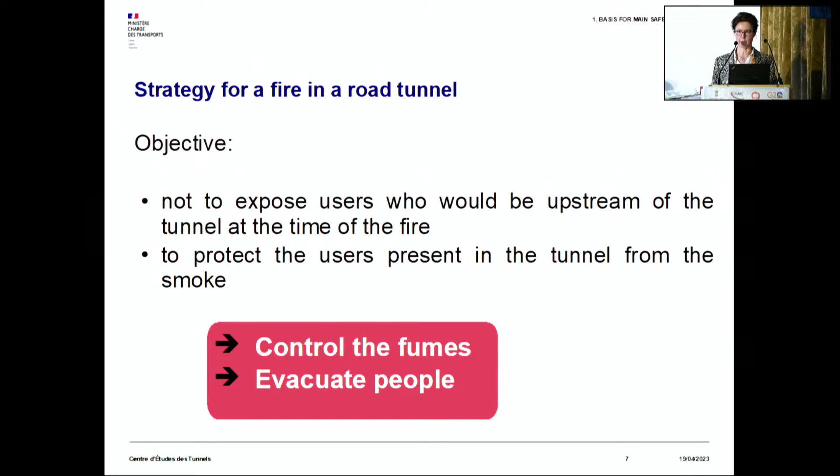Concerning the evacuation of people, we have a two-phase strategy divided into 2 successive steps. The first step is self-evacuation. Its objective is the protection of users when they're alone in the tunnel. And the second stage starts later because you need time for rescue services to get on the scene in the tunnel. Most of the time there are no first responders inside the tunnel, so the objective of the intervention of fire and rescue services will be to help save the people who are still in the tunnel when they arrive on the scene.

This figure is the model of evacuation time of users in a road tunnel. If you consider a fire starting in a tunnel, let's say at time t0, after a certain time, which is the end of the yellow arrow here on the top dashed line, at that time you will have reached the limits of bearable conditions where the fumes will be toxic and the people won't be able to bear the fumes anymore.

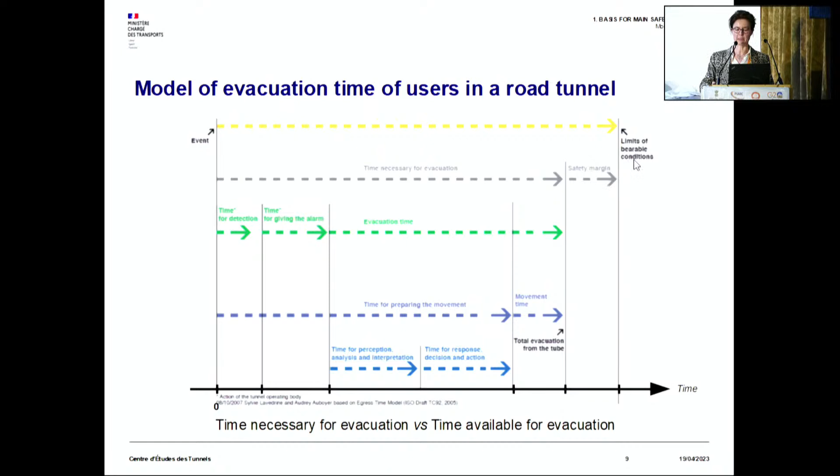As you can see from this model, before making a decision of evacuating or not, there is an initial analysis time for the road user, because the users act according to elements or signals that they perceive, to the interpretation they make of these, and thus their representation of the situation at a given moment.

This means that we'll have to take into account the following knowledge for improving the self-evacuation of users. We will have to deliver an alarm message which is suited to the situation, provide information on dangers faced, give the instruction to quit the vehicle and evacuate on foot towards emergency exits, and also assist the users throughout the evacuation process until they return to their vehicles.

In terms of equipment, we can use such systems as an alarm siren to raise the alarm so that users understand that there's an important event happening in the tunnel. We'll also use dynamic chevrons to direct users towards the emergency exits. Also, we will use flashing lights on each side of the emergency door so that these doors are emphasized and the users understand this is the place they have to go.

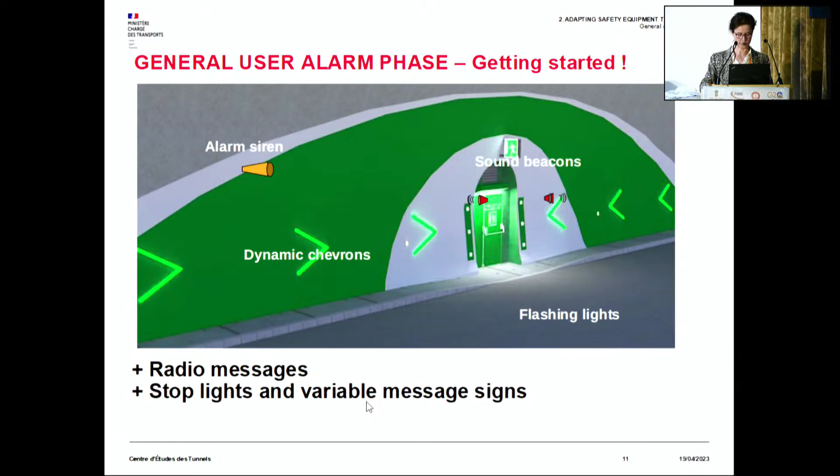So this is an illustration. Thank you for the sound. So first the sound, the siren, then the lights. And the message that says to the users that they have to get out from their car.

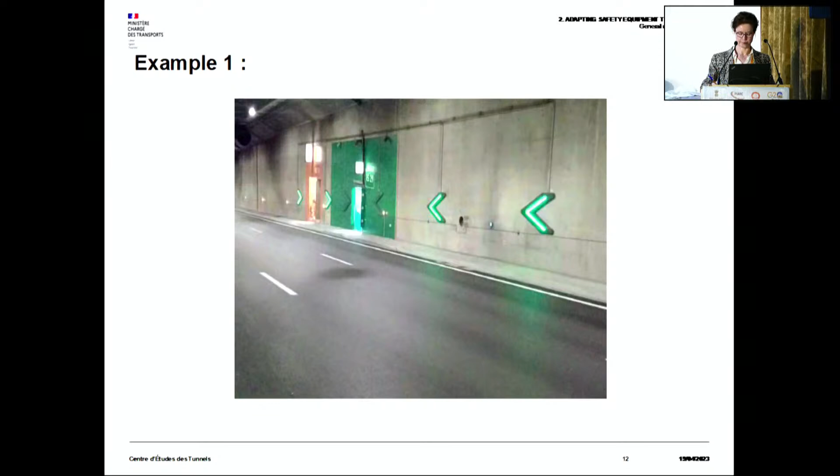During the evacuation phase, while users move towards the exit, we use a combination of regulatory signaling, which is shown on this slide here. These are the green signs showing the location or direction of the exits.

These are associated with luminous markers on each side wall, which are constantly lit even when there's no fire. They are located at a height of 1 meter, spaced at about 10 meters from each other, and they are supposed to guide the users towards the exit. They should be visible even in case of smoke. And it's recommended that the additional systems already activated during the general alarm phase should continue to function.

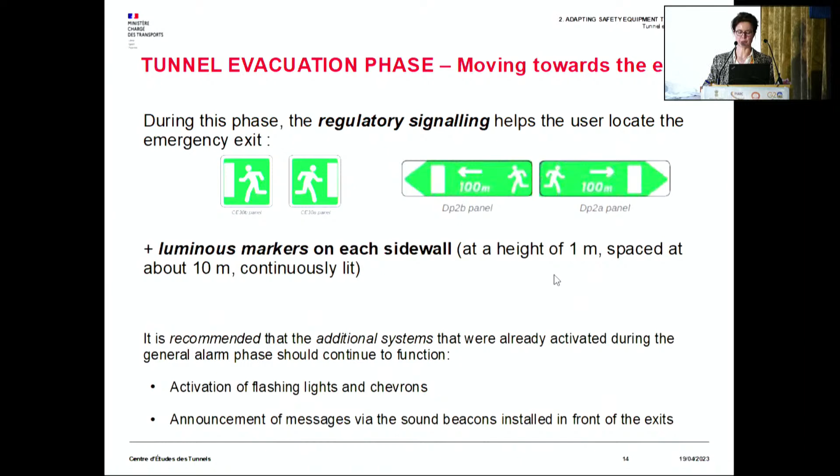Then we come to the evacuation case in emergency exit, while the users are waiting for rescue services. It's essential that the support for self-evacuation does not stop once the user has quitted his vehicle and has passed through the exit door. It's really desirable to guide the user to the exit and as far as possible to provide him with information about the situation.

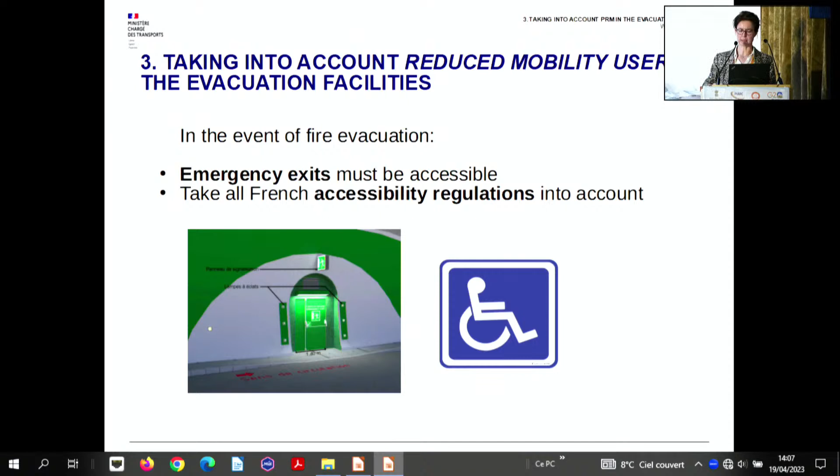In order to take these reduced mobility users into account in the evacuation facilities, we have to consider that emergency exits should be accessible, and also that we should take all French accessibility regulations into account. This means that in the first place, we should have a lowered curb to access the emergency exit doors.

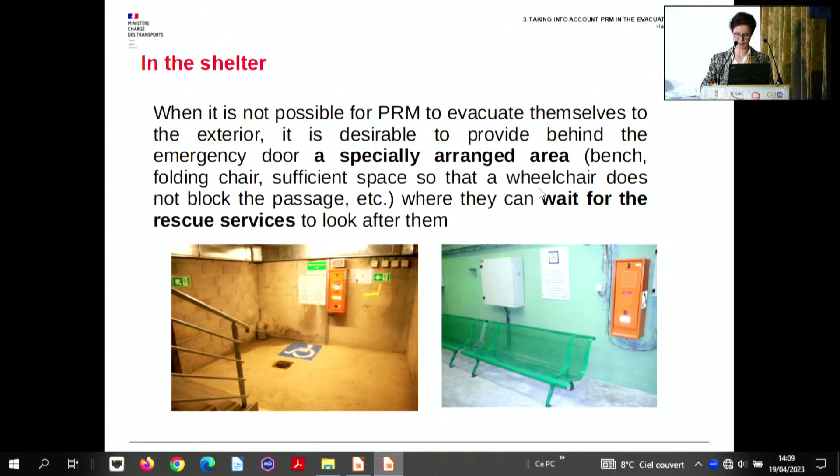Now, a few words about supporting actions directed towards drivers or the general public. The Highway Code in France includes questions on tunnels, which have actually been introduced in the Highway Code exam since 2008. Also, a training course package has been developed for professional drivers since 2012 for the French version and 2013 for the English version.

In terms of education of the general public, at CETU we have published a series of short films since 2018, and more recently another one in 2023. The first short films dealt with the situation of driving through a tunnel, having a breakdown in a tunnel, and what to do in case of a fire. More lately, we have produced a film on safety distances in tunnels.

All these films are available on YouTube and Dailymotion. They're also available on CETU's website, and they have been provided to French tunnel operators and French motorway associations. So, as a final point, I suggest we have a look at the short film, which is 1 minute long, on what happens in case of a fire in a tunnel. The subtitles are in English, the voice is in French.

I will give you a short introduction. I will also say what influenced the outcome of incidents. I will have a look into the traffic control centers, the heart of safe operations on road networks. I will say something about operational challenges on road network and recent experience, and for God's sake, start in early planning with the operation and maintenance issues, so that will also be emphasized. Followed up by something called RAMS. We will also look into standardization and also research, development and innovation and ITS impact on the future tunnel.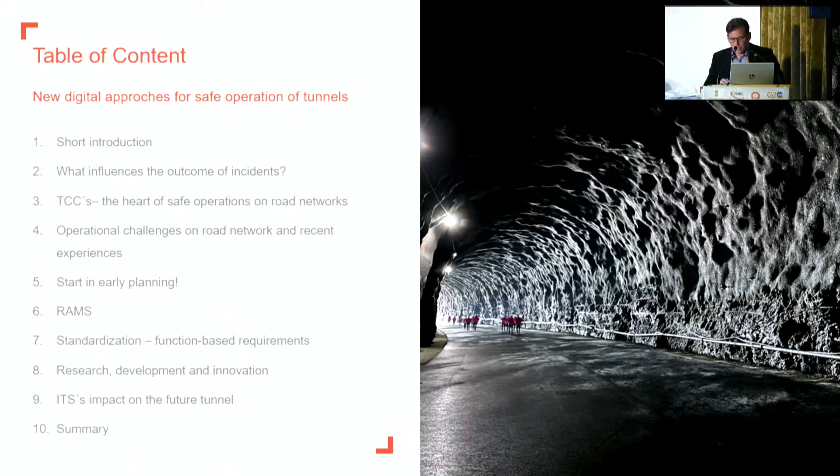As I said, I have some relevance. This is me on prime time television explaining to the Norwegian people if the road tunnels are safe in Norway. And this is right after we had a catastrophic fire with no injuries actually, but it was a 400 megawatt fire in a long subsea tunnel. Long subsea tunnels will be my presentation tomorrow, so I will say more about that, but more about planning and construction of those, but also a little bit of operation and maintenance. So this is, of course, a matter of interest also for the public, because this is about the safety of the public.

When it comes to ITA COSUF, I will give a small promotion of this beautiful network. This is a committee within the International Tunneling Association, and it aims to be the center of excellence for worldwide exchange of information and know-how regarding safety and security of underground facilities. It's not only road, it's also all other underground constructions we are involved in. And it's a very nice way of meeting good professionals within this topic, so I highly recommend this for people from India.

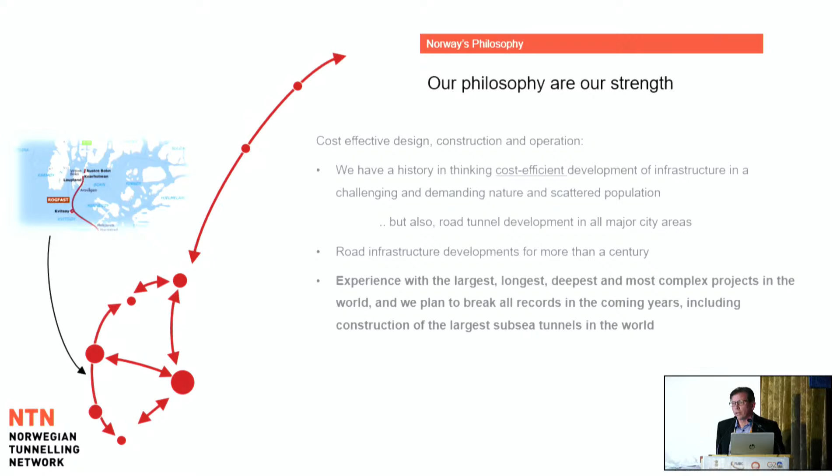Cost-effective designs. Requirements that ensure the right level of investment. We have to remember, we have to have our investments also on other things, like the road outside the tunnel. That means that traffic density, characteristic of the tunnel, and a systematic evaluation of RAMS criteria and risk decides the design of a tunnel.

That also includes all the electric technical facilities and the digital approach. It is important to be able to invest in a cost-efficient road network in both city and rural areas that balance the investment on open road and tunnels, considering traffic safety and other risks in a systematic way.

Very short, what influenced the outcome of an incident? We have to remember it's not only technology. It's very often we are talking about technologies, but it's also organizations and also individual human resources also involved in this, and everything has to cope together.

So that means that we have to have a very good framework of regulations and processes and documentation that support all this attention, and also, of course, the commissioning and safety approval. One of the best things that have happened for Europe is actually this EU directive that says you actually need to have a safety approval for opening a tunnel, and that makes it much easier for the people that is concerned about the safety.

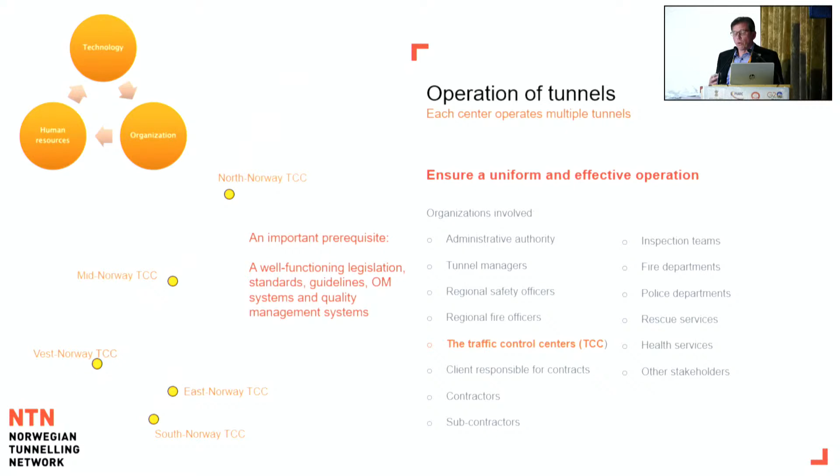We have to ensure a uniform and effective operation, and we manage to do that because we have a very high professionality when these have to cope with the whole region. They are training every day on live situations, and they are really up to date when it comes to this. But it's also a lot of other organizations involved, and you can see them here.

But how do new experiences influence the tunnel regulations? We had some severe large tunnel fires in 2011, 2013, 2015, and 2017, and we have had some afterwards. For instance, in Gudvanga Tunnel, 67 people were caught in the smoke for 2 hours. What really happened there is a very good example of reliability, because we lost, before the incident, the communication on one of the zones in the tunnel.

That means that the ventilation could not be controlled in that area. So when the fire happened and we have a predefined ventilation direction that is suitable for the fire department, suddenly we had some of the fans going the wrong direction. So the reliability on these systems is very important and sometimes forgotten.

And when I investigated this in this specific tunnel, they had these failures about 1,500 times for each zone in a 3-year period. And then I asked, do we really have ventilation in that tunnel that is sufficient? This is something we need to pay attention to also.

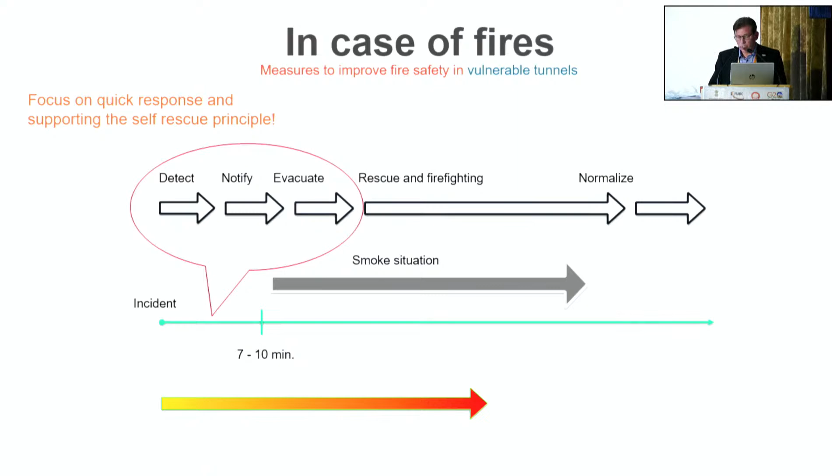So focus on quick response and supporting the self-rescue principle is, of course, very important. Start in early planning. Operation and maintenance is an important prerequisite.

What we have included now in the regulations in Norway is something called RAMS analysis. This is something you do for the whole system, for the whole tunnel, but also on the individual system. It says something about how you should prioritize availability. If you have a subsea tunnel, like the Rogfast tunnel I described before, you have about a 4-hour drive around to get to where you would like to go. In that case, availability is very important, and that means you have to install different kinds of systems that make sure you can use the tunnel even if one of the tubes is not working. Then you have to have additional safety measures to cope with that.

So suddenly you are introducing a concept of bidirectional tunnel in that unidirectional tunnel and so on. That is also very important. I will come into this tomorrow as well.

I will just mention, to support this kind of development when it comes to developing new systems, please never specify your guidelines on products. Specify as function-based standards. That is the recommendation, because then you make sure the industry has a chance to respond and get to the contracts right away. The standardization organizations around the world are experts on that, and it's a very big mistake to move into an area where you don't allow any innovation at all.

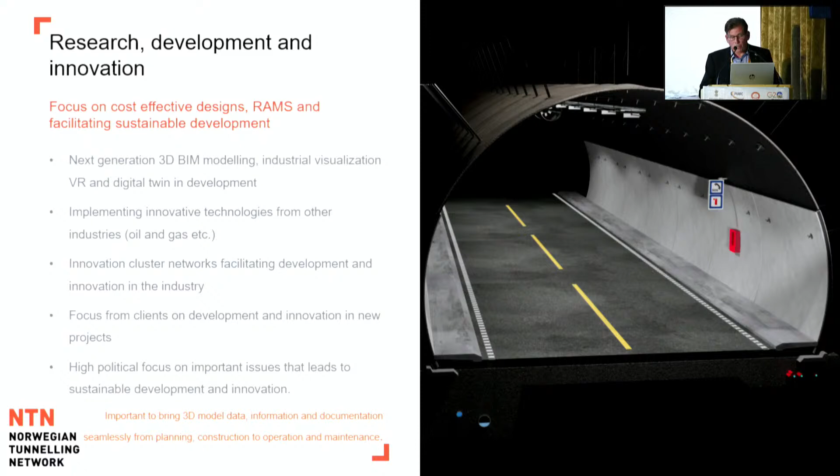When it comes to research, development, and innovation, focus on cost-effective designs, RAMS, and facilitate sustainable development. So what we are working with now is next generation 3D BIM modeling, industrial visualization, VR, and digital twin. The digital twin is very important for the final approval of the tunnel, the commissioning, because if you can start that process a little before, you can have a much more cost-effective project. I can also speak about that, but that's a completely different presentation.

We have a very good example in an innovation project between the Public Road Administration and the industry. The Public Road Administration, together with the government, Innovation Norway and so on, made a competition for which company could help create a new innovative way of making evacuation easier in the tunnels. They developed a system for fire incident detection, localization of fire, and an evacuation assistance system. The node can be supplied with cameras for video surveillance. The Evacsound system supports sensor acquisition for fire incident detection and video surveillance. This system uses 21st century technology innovations to deliver psychoacoustic direction in evacuation, public address messaging, and lighting effects in a very cost-effective way.

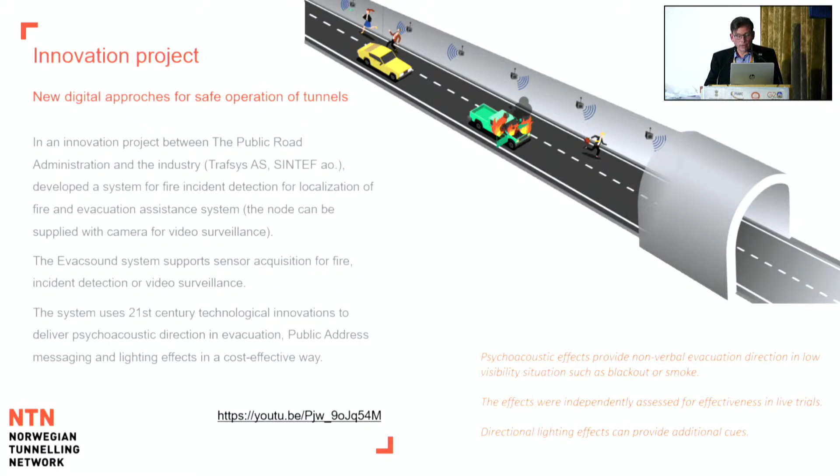I have a short video about this, if the internet is working as we hope. Maybe I should move to...

The Evacsound solution consists of nodes throughout the length of the tunnel with a 25-meter distance between the nodes. The nodes are placed 2.7 meters above the road. The location is the result of acoustic calculations and temperature profile for fire detection.

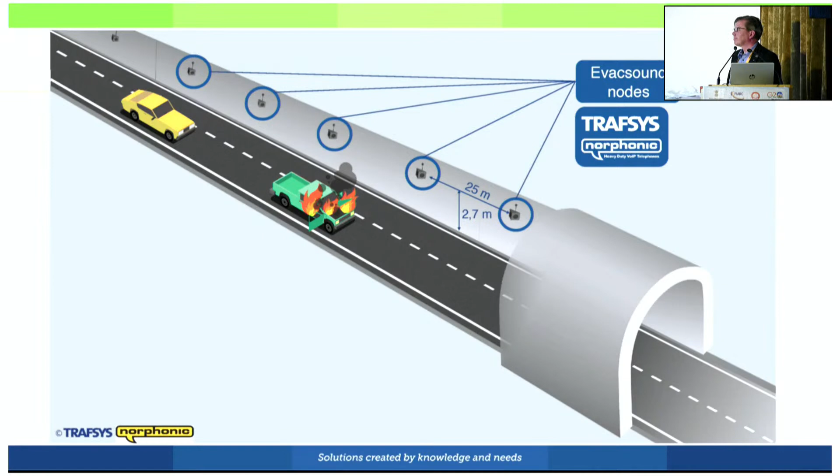Each node consists of directional speakers, a microphone, and temperature sensors. In addition, the nodes can be equipped with LED lights and a camera.

The temperature sensors in each node are used for detection of the fire location. When a fire alarm is given, the road traffic center will initiate an evacuation. The evacuation will take place away from the fire and towards the tunnel portals or emergency exits if there are any. The evacuation principle is to use sound guidance to guide people in the right direction.

SINTEF Research Institute has carried out tests in the Runehamar test tunnel in Åndalsnes, Norway, which show that 91% of the test persons followed the correct direction. There was no significant difference with and without background noise. The SINTEF report has been published on the prestigious website Science Direct and can be studied in more detail there.

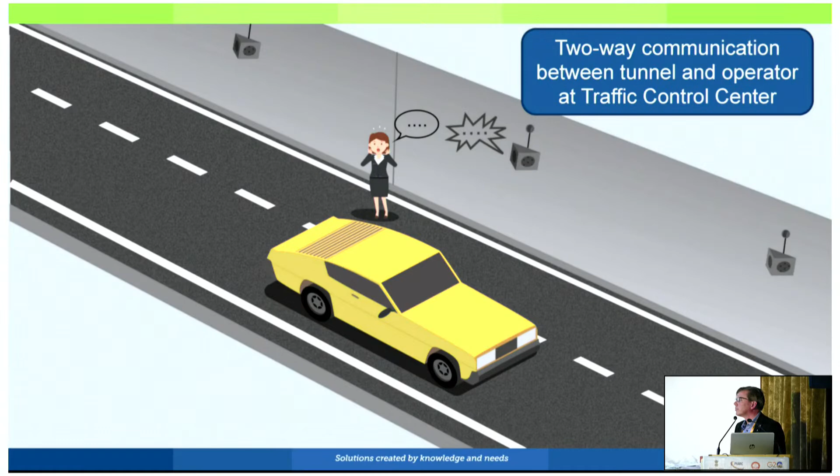Since a microphone is installed in each node, it is possible for the road traffic center to set up a two-way conversation with the individual nodes. This means the operator can communicate directly with road users near a node. The system also functions as a conventional public address system where you can give regular voice messages to road users in the tunnel.

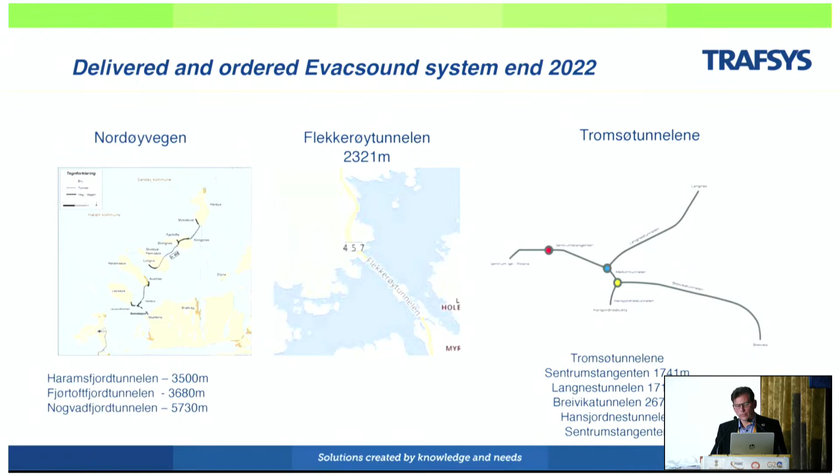The results of the development are so good that Evacsound has already been installed or ordered for the following projects. Nordøyvegen is delivered with reduced functionality, only as a public address system. Flekkerøy Tunnel is delivered with full functionality, and the Tromsø tunnels are ordered with full functionality, ordered from Trafsys.

Oh. How do I switch here? Okay.

Very shortly, if you allow me, Erik. Oh, thank you so much. What a great friend.

When it comes to ITS systems, this is a great opportunity for the future, we think. This is something we have investigated also in PIARC, and we will continue to investigate. What is an ITS system? It contains technical installation that gives and receives information, technical installation that is controlled, but also applications, SCADA systems, single applications that process information to either give support to the TCC or control the technical installations directly. We also have to remember new mobility concepts and vehicle types will affect tunnels, probably in a positive way. At least I think this is something we can benefit from in the future.

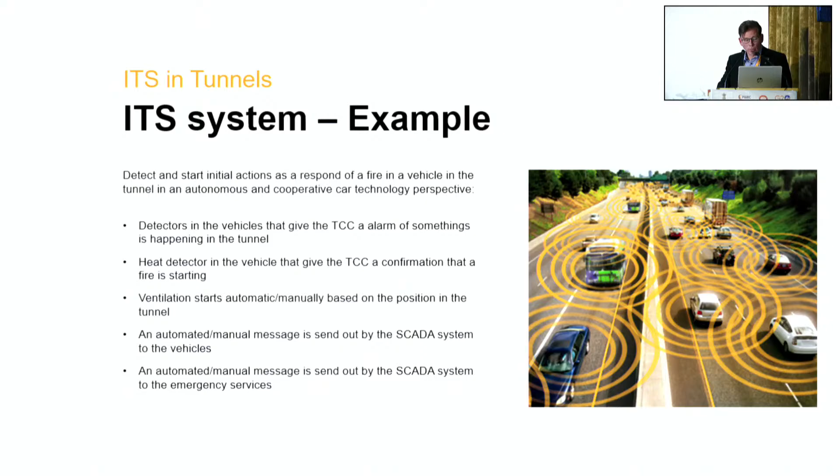So thank you very much, and I hope you bear with me, as this presentation came very, very late at the end of the day. Thank you.

Thank you very much, Arild, for this overview about new technologies and what they can offer for the future. I think the three presentations were very complementary. They raise a lot of questions, so it's time for a question.